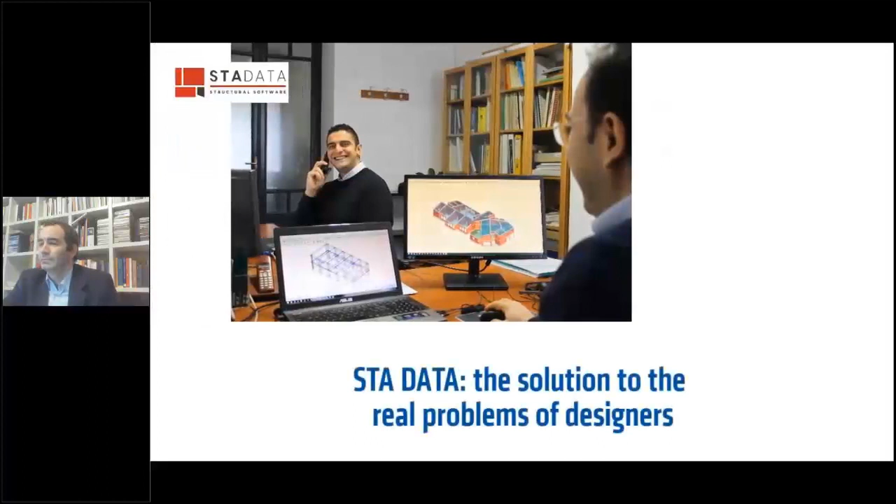The company is currently composed of 15 employees and several consultants, all highly qualified professionals. Thanks to the continuous development of work and collaboration with the university and professional world, it is always able to offer advanced and constant updates to its customers. The STA DATA application allows you to face everyday work with simplicity and effectiveness. The company's goal does not end with the search for new IT solutions. The offer of STA DATA includes support, training, and consulting services, including individual projects, so that professionals are immediately operational. Thanks to the technical expertise and state-of-the-art solutions, STA DATA is a solution to the real problems of designers.

3Muri is the masonry structures analysis specialized software. It is the leader in the world. It is used for existing and new buildings. The software performs nonlinear pushover analysis. The mesh is made with the FME method, frame by macro element, specially studied for masonry structures to better represent the behavior of masonry structures.

Now the software is available in Italian, Greek, English, German, French, and Albanian, and performs analysis according to Eurocode 6, Eurocode 8, Italian National Code, Switzerland National Code, and the Netherlands National Code. 3Muri originates from Professor Lagomarsino's academic research, and it is actually used for this purpose in more than 80 universities. Engineers and companies that use 3Muri for professional purposes are widespread in more than 30 countries.

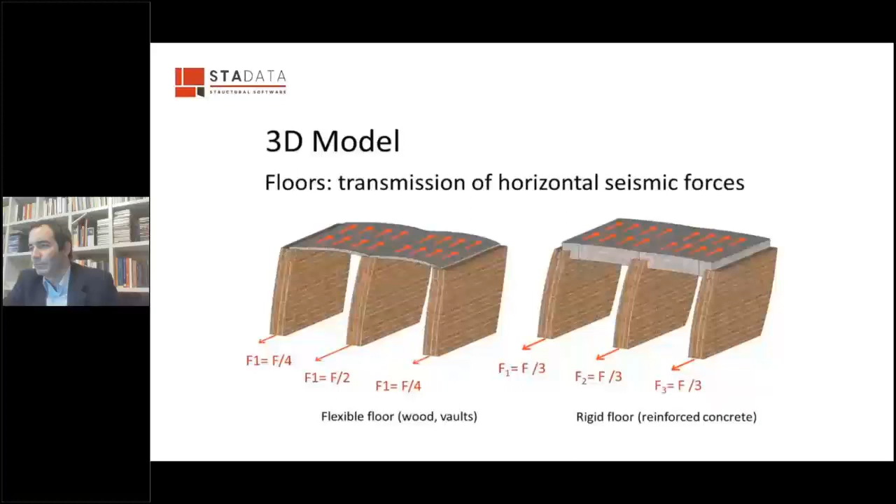Now let's go through the modeling inside 3Muri. One of the most important characteristics of 3Muri is that it is possible to model floors with their real stiffness. As you can see in the picture, this allows you to take into account the correct distribution of the seismic forces on the walls. Inside 3Muri a library of walls and floors is available, and in this way you can easily model this kind of elements. These are the walls that are available in 3Muri.

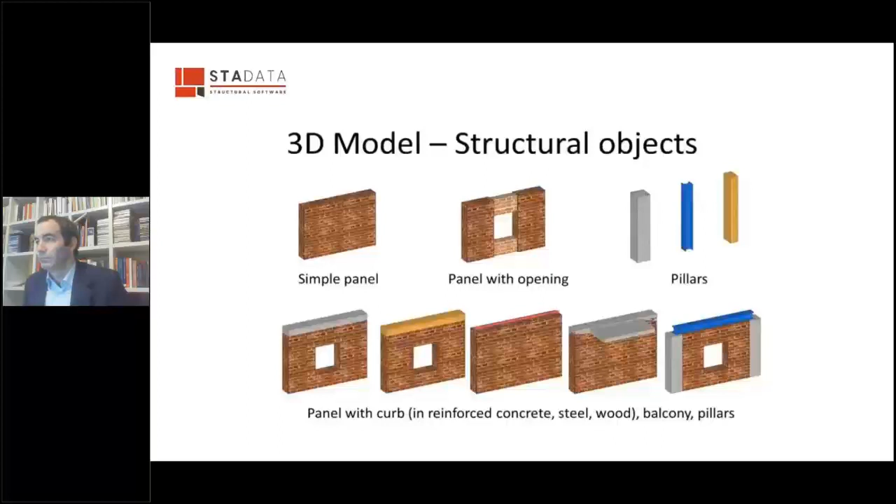Even if the majority of floors can be modeled with this library, inside 3Muri it's always possible to define directly all the parameters of a floor in order to create your own definition and the real stiffness of the real floor you have in the structure. Moving to the vertical elements, several structural objects can be modeled in 3Muri, like single masonry walls or reinforced concrete walls, columns and beams, and a combination of walls with beams and tie rods.

Into a wall can be modeled different materials and elements, which can also have the function of reinforcing the current wall. To reinforce walls in 3Muri, you can easily model reinforced masonry, reinforcement with FRP and FRCM.

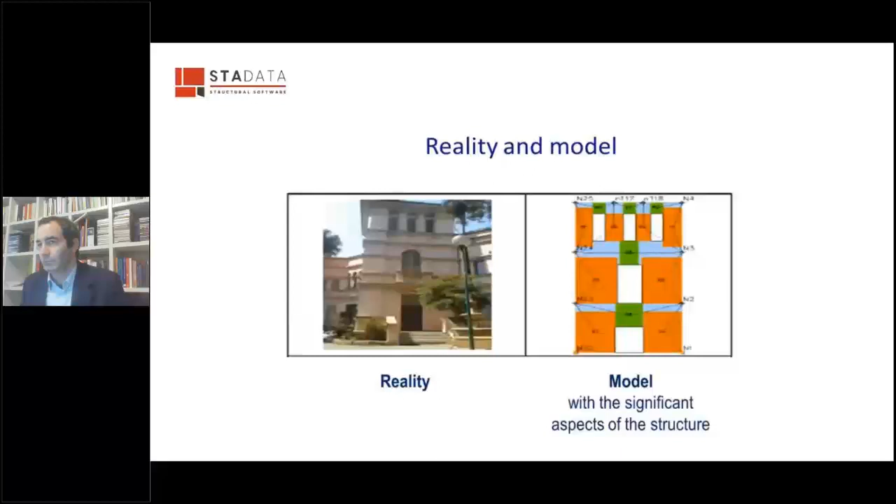The mesh inside 3Muri is specialized for masonry structures and is made with a frame by macro elements method. This method has been studied for masonry structures to better represent the behavior of a structure with a main structure in masonry. Using this method, thanks to the automatic mesh performed by the software, the engineer can easily pass from reality to the model.

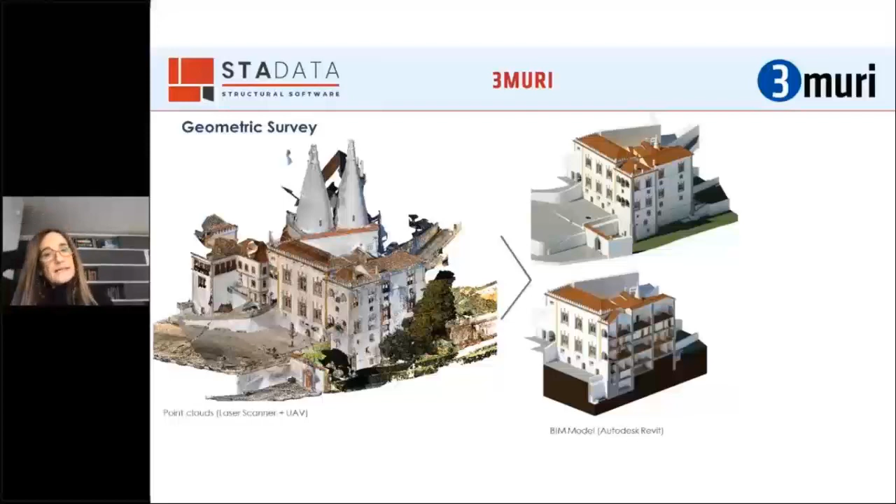In this slide, you have only one wing of the palace, the Manueline building, and a BIM 3D model represented on the right side of the slide. So from the laser scanner of the outer and inner surfaces of the palace, it has been possible to obtain an incredible 3D definition of the geometry of the structure.

To illustrate this, here are some results of these outcomes. We have the complete geometry of the two massive conic chimneys in the palace, the possibility to be sure about the thickness of some walls connecting different parts of the palace, for example the chapel and the kitchen, where the width varies completely along the length of the wall, or to detect some curved walls that would have been impossible to get from other surveys without using laser scanning.

You can also see from this image the possibility to get very carefully and precisely the geometry of the roofing structures, which consist mainly of timber trusses of different types, all over the palace with the exception of the kitchen. All the buildings have timber trusses for the roof, and I'm completely sure that obtaining the correct geometry is crucial for the calibration of numerical models.

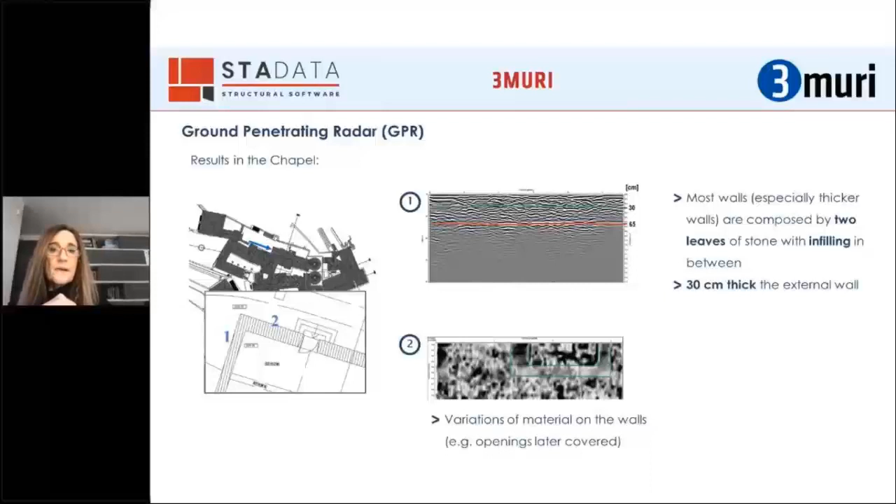For the characterization of masonry, we start with some sample collection, so it's a qualitative characterization of course. The location was chosen on the main structural walls that characterize the principal periods of construction of the palace, being aware of the countless limitations we have in a palace because of the existence of tiles and painting, so it's rather tricky to choose the place to get these masonry samples.

The flat jack tests were carried out preferably in the same walls where samples of masonry had been removed, or if not possible, in very close walls. The objective was to characterize the mechanical properties of masonry.

It's worth mentioning that the inspection windows we obtained before carrying out the flat jack tests allowed us to proceed to the masonry qualitative evaluation. So it was really very important for the qualitative evaluation of the masonry.

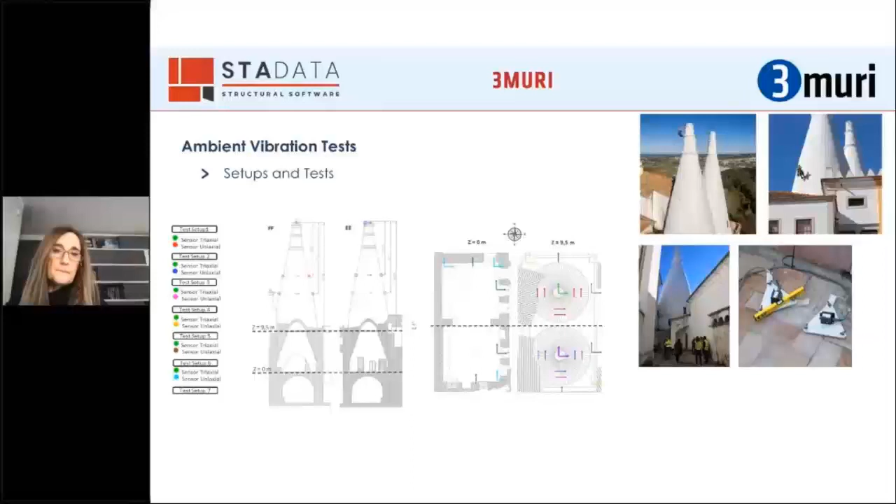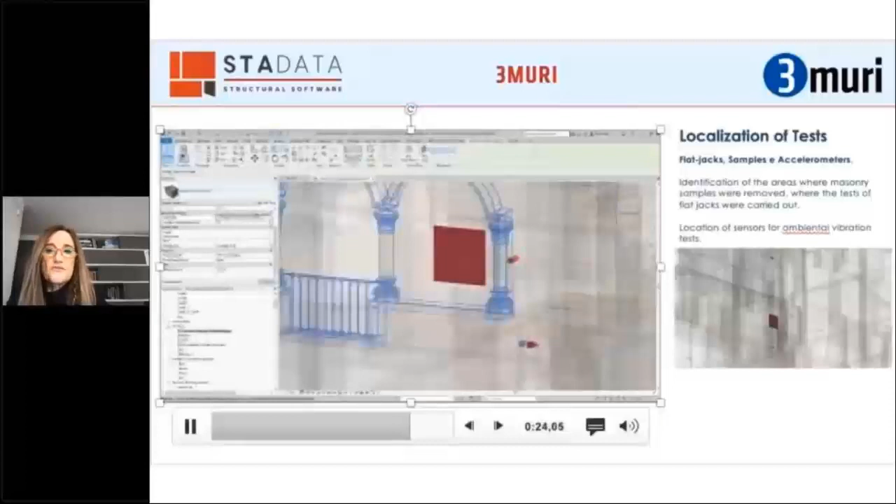This film shows how the information related to the masonry samples, flat jack tests, and ambient vibration tests have been inserted and linked to the BIM model. We have the identification of the areas where the masonry samples were removed, where the flat jack tests were carried out, including some photos and the main results reached. For instance, for the ambient vibration tests, the location of the sensors and the modes of vibration have been considered and included in the BIM model.

In the BIM model, it was identified all the floors and walls where the GPR tests have been performed, and the main results were really important as well. As you can see here, linked to the BIM model, the report with the main results of these GPR tests.

The mechanical characterization of the materials defined after the realization of the experimental campaign and after the calibration of all the numerical models were also linked to the BIM model. Here you can see for the same building, the Manuelino building, all the types of masonry and materials considered in the model, as well as the properties needed to perform the nonlinear analysis of the global model with the 3Muri program.

So let's move now to the definition of the seismic assessment itself and numerical modeling of the palace.

The definition of an effective nonlinear model for the seismic analysis of masonry structural elements represents a crucial step towards a proper seismic assessment of existing masonry building structures. For the seismic assessment of the palace, we have considered the in-plane and out-of-plane responses of the masonry, and we have performed nonlinear analysis.

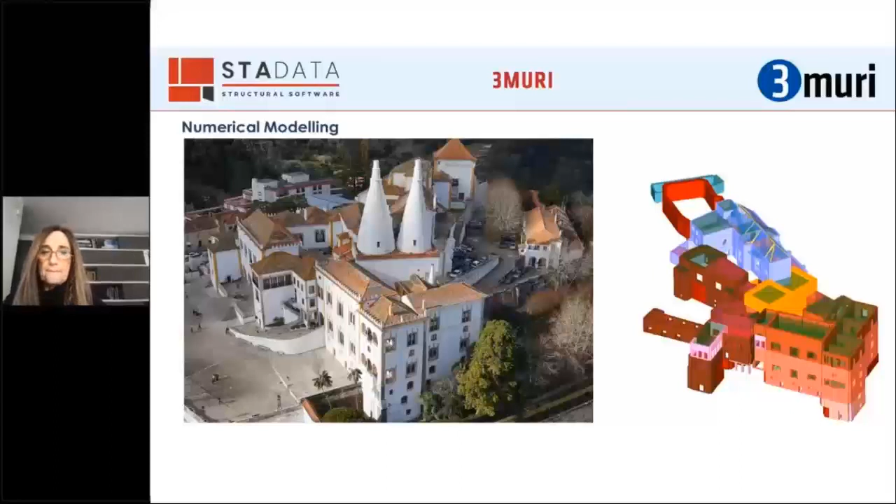Therefore, separate models were developed and calibrated, considering all the time the effect of the adjacent buildings and taking into account the field survey and results of the experimental campaign, mainly the ambient vibration tests, which were crucial for the calibration of the different numerical models.

So here we have the identification of all the bodies considered in this study, with the designation of the names given for all the bodies. I have to say that among all these units, unit 1, the Manuelino building, and unit 10, which corresponds to the kitchen with its two high chimneys, were the most challenging ones, due to different reasons.

If we move to the Manuelino building, this challenge was mainly due to the dimension of the building, irregularity in plan and in height, different levels, and walls without continuity in height. These were the main reasons why it was so difficult to reach the final model of this wing of the palace.

For the kitchen, unit 10, this was mainly due to the presence of the two massive chimneys with a conic configuration. In this case, we have used different software, starting with SAP 2000.

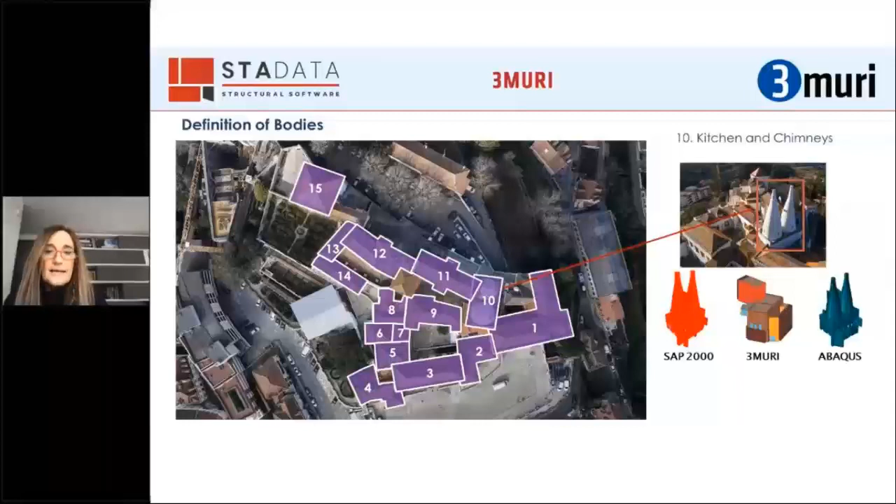So now, to illustrate the type of results obtained, the main results for this Manuelino building and just for the other body connected to unit 1, I'm going to show very briefly the main results that we obtained.

For the Manuelino building, as you can see, we have the building itself, and we modeled it taking into account the constraints imposed by the other building. This is the other building which connects to the Manuelino building at this part, and this is the kitchen which also connects to it. Small parts of these buildings are modeled, the ones necessary to obtain the correct dynamic characteristics for the analysis, and we considered different types of materials described on the right side of the slide.

For the global seismic assessment, we take into account the in-plane behavior of the walls. We performed nonlinear static analysis with the 3Muri program.

In this slide, the damage pattern for the ultimate displacement of pushover analysis is represented for the load applied in both X and Y directions. The distribution of damage of different masonry walls is represented for the near collapse limit state. This extreme situation allows us to identify the most vulnerable structural masonry walls and the type of behavior we expect, whether shear or bending controlled.

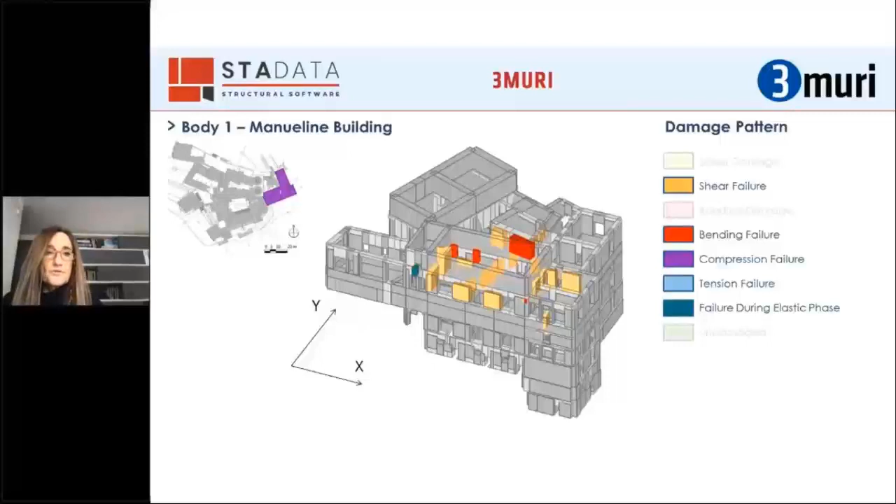We also considered the out-of-plane response of the building. This was evaluated by nonlinear kinematic analysis with the 3Muri program using the modulo local mechanisms. But given the very good conservation of the palace in general, no cracking state has been acknowledged.

Thus, the identification of possible out-of-plane mechanisms was based on the geometry of the building and assumptions related to the quality of connections between orthogonal walls and the roof, and between walls and floors, the layout of openings, constructive details, and restraints given by the structure such as the presence of tie rods. All these were taken into account to define the mechanism with the highest probability of occurrence.

A similar type of study has been done for all the other units or bodies into which we have divided our palace. Just very quickly, what we get for the other buildings, bodies 2, 3, and 4, that were connected to the Manuelino building.

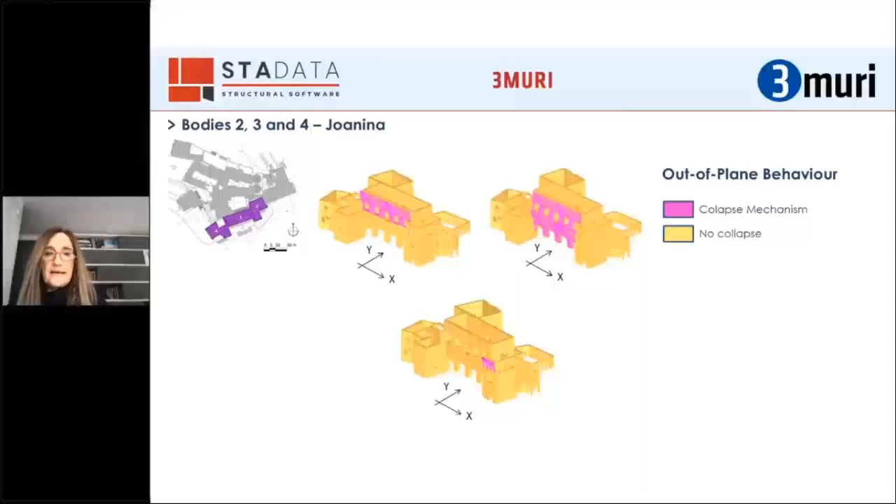So, to finish my presentation, just a few final comments I would like to give. Due to the complexity of this cultural heritage building, the seismic assessment poses a strong demand on structural engineering skills and on the available structural analysis techniques.

The procedure followed here seems capable of providing a reliable seismic assessment of such complex structures. In my point of view, it's a good compromise between computational effort and guaranteeing a trustworthy assessment.

Finally, related to this last image, in this study we had the BIM model, the distribution of damage of different masonry walls for the near collapse limit state. These have been implemented in the 3D BIM model. In this work, we did not explore the 3Muri BIM model.

This should be explored in the future, and of course, easy incorporation of these results in the BIM model as attributes enhances the capabilities of BIM, and will be very helpful for decision support within the heritage management framework, and certainly very useful for any management team of this type of structure.

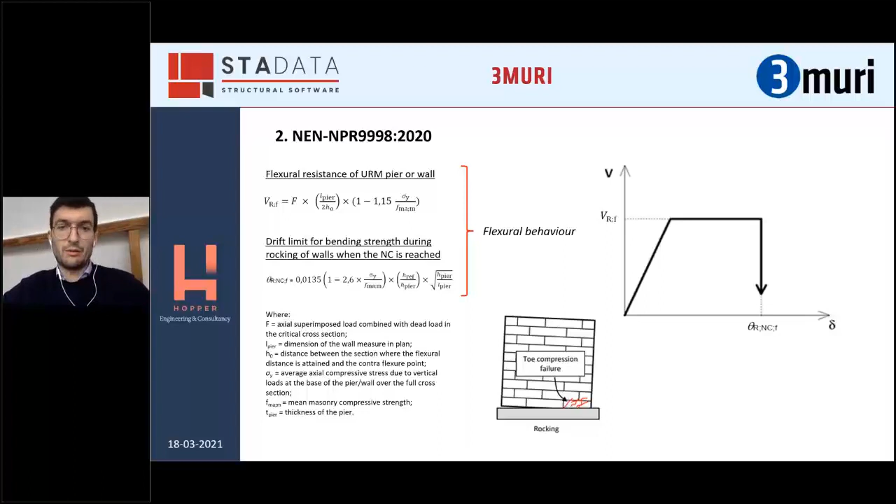The shape of the backbone is very similar to the Eurocode, so similar to what's generally used in Italy. There's a little difference in the shear behavior: the bed joint sliding peak value from the backbone is derived from the generally known equations, followed by a post-peak behavior which is only the frictional part. Also interesting, for this mechanism the in-plane drift is set for near collapse at 0.75% of the effective height, since everything here is set for near collapse.

Another important thing is when to stop the analysis. Generally, a 20% decay is used; in the Netherlands, the national code uses 50% decay, meaning a reduction of the base shear by half, and this defines the final pushover curve.

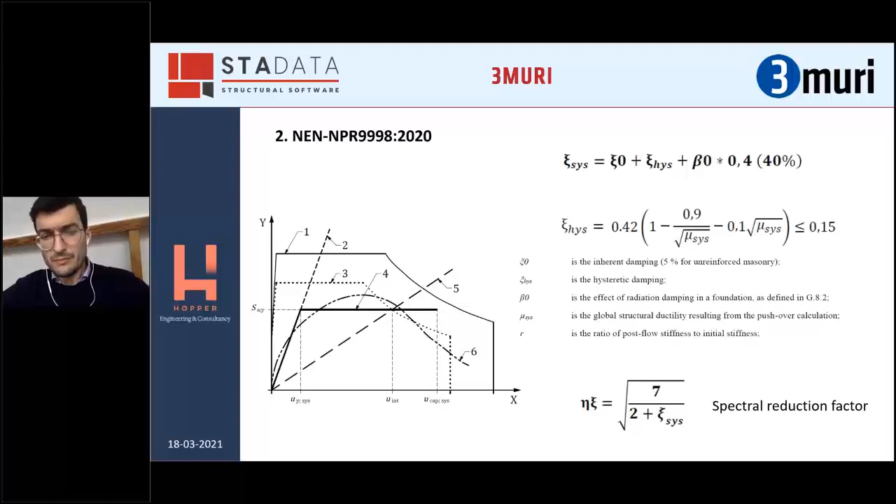It's interesting to compare this with what's commonly done in the Eurocode regarding calculation of the demand. In the Eurocode, as in Italy, we generally use the N2 method. In the Netherlands, it's normal practice to use the capacity spectrum method, in which the elastic response spectrum is reduced accounting for extra damping. The final damping is the sum of the inherent damping, commonly 5%, and the hysteretic damping, calculated per NPR equations, generally not bigger than 15%. So all buildings easily reach about 20% damping.

So acceptance criteria is basically an intersection. The building can be considered passing the check if the bilinear curve, derived of course from the capacity curve, can intersect the overdamped response spectrum.

Let's move quickly to the examples. Those attending from the Netherlands will recognize this as a very common building type in the Netherlands and also in the Groningen province. This is a terrace house, basically a composition, a block with more units.

It is characterized mainly by large openings in the longitudinal direction in the front and back facade. So we have a very weak direction, the longitudinal, and a very strong direction, the transversal. The load-bearing part is usually the transversal walls. In this case there are concrete floors, but you can easily find a version of this building with timber floors. The floors generally span from transversal wall to transversal wall.

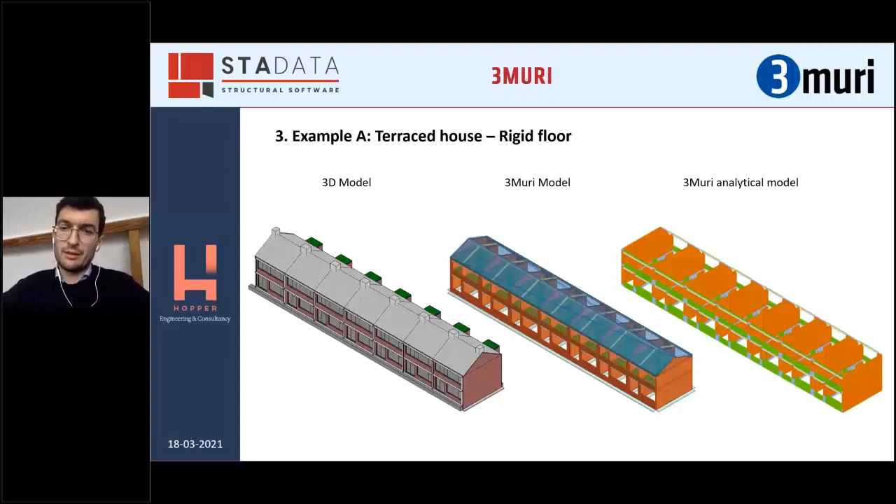Here is just an example of how to go from the 3D model to the 3Muri model, to the 3Muri analytical model, in which, as we just said, there is no roof. The response spectrum can easily be downloaded from a web tool.

So some results for this particular building. The longitudinal direction is governed by flexure, because the piers are very, very slender and few of them, due to the openings. The capacity is quite large.

The spectrum has a damping of 20%, creating an intersection. So the check is okay, the building is okay. This is the worst combination in X.

An interesting aspect of the NPR is that you can account for P-delta effects. Basically, when you have not too many piers, you can derive a factor by which you can reduce the capacity or increase the demand, depending. In this case, we reduce the capacity.

Completely opposite behavior in the Y direction, basically the strong direction, in which the building is reacting mainly in shear due to the squat walls. As we said at the beginning, this is the strong direction, and you can see by the intersection - the intersection with the elastic spectrum is happening in the elastic range, so also in this direction there are basically no issues.

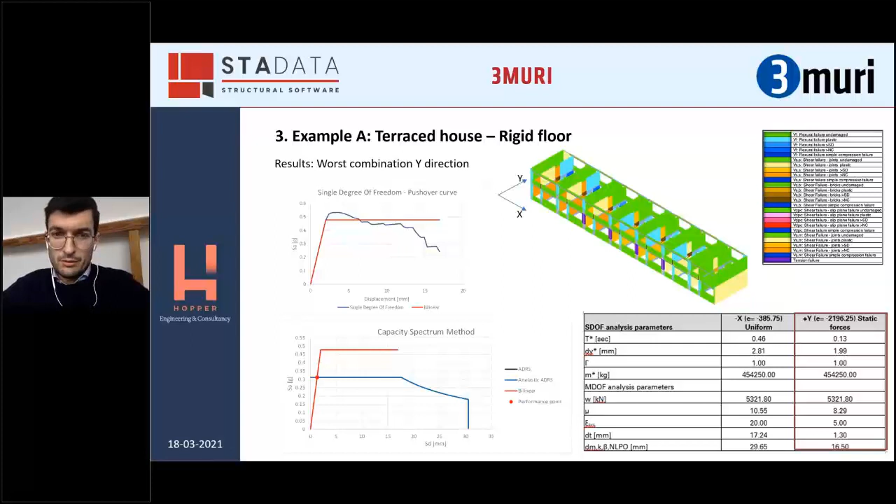This is the summary of the 24 combinations. They are all fine, basically.

Another interesting aspect to mention is the possibility to take into consideration torsional effects, meaning reducing the capacity or increasing the demands with a factor to account for the torsional flexibility of the building. This can be done according to the NPR with a modal response analysis.

As well known, pushover analysis is not enough to provide an idea about deficiencies and possible retrofit measures required for a masonry building. So usually when doing this kind of assessment, we always do a modal response analysis to check the roof and timber components, and also to calculate the torsional factor.

We check the existing condition for boundary conditions, nonlinear kinematics for out-of-plane response, check of non-structural elements, and check of foundations.

The second typology I would like to present is the so-called detached house, in which basically they are isolated buildings, mainly one floor. So they present also a different but still timber roof. Sometimes the roof can be very, very complex.

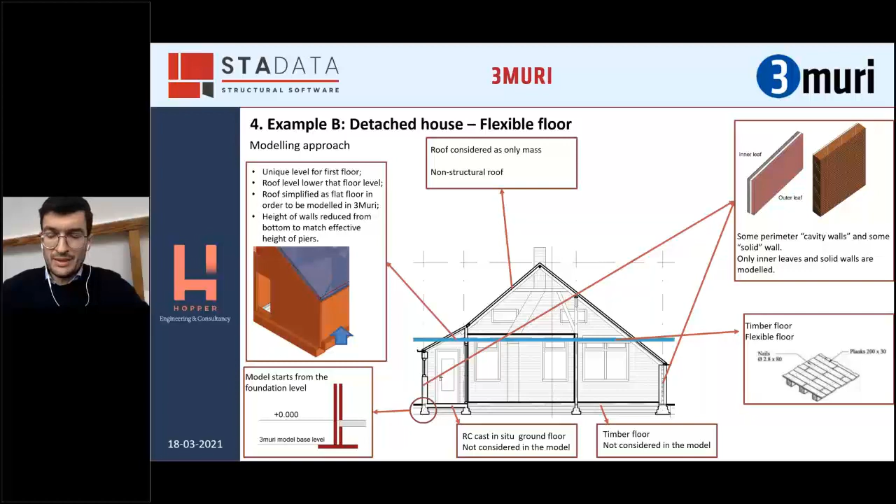This means that compared with the previous building, where a global analysis is correct and possible, for this type of building, since redistribution is not guaranteed by the flexible floor, we prefer an assessment wall by wall, in which distribution is not taken into account at all.

So again, this is shown now to go from a 3D model to a 3Muri model to a 3Muri analytical model, in which we don't have the roof.

The response spectrum follows the same approach as before. Results in this case are presented wall by wall, as we said. This is again one of the worst combinations in the X direction, in which the outcome is positive.

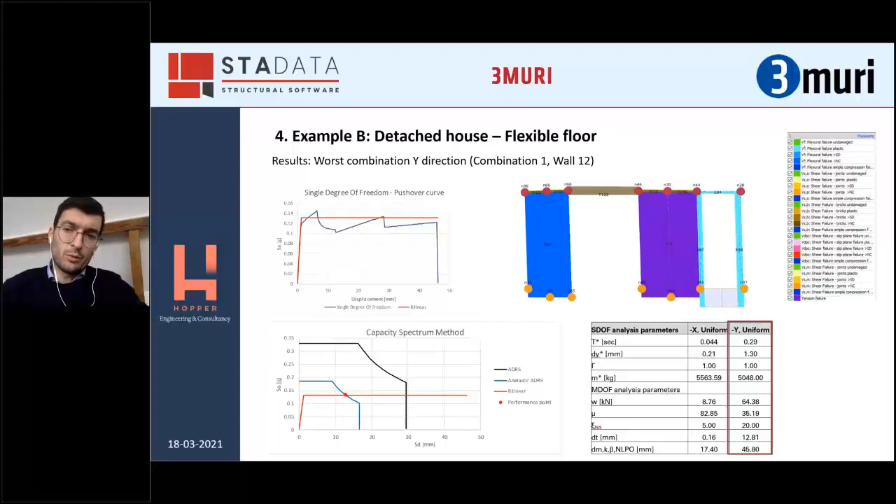Same for a wall in Y direction. And if we want to have a summary here, of course the combinations are more numerous, but it's not about combination, it's just that this is a wall-by-wall assessment.

As you can see also here, basically all the walls are fine. So again, I will not repeat, but basically in order to have an idea about the building, a number of other analyses and assessments and checks need to be done.

So finally, some conclusions to wrap up. Along the years, specific advanced studies and analysis were carried out in order to adapt the approach from Eurocode and New Zealand code to the Dutch buildings for the in-plane assessment. Several tests and research programs were carried out over the years to improve and remove conservatism from the Dutch seismic code. The substantial reduction of gas extraction in the region over the years led to a decrease of the seismic hazard prevision.

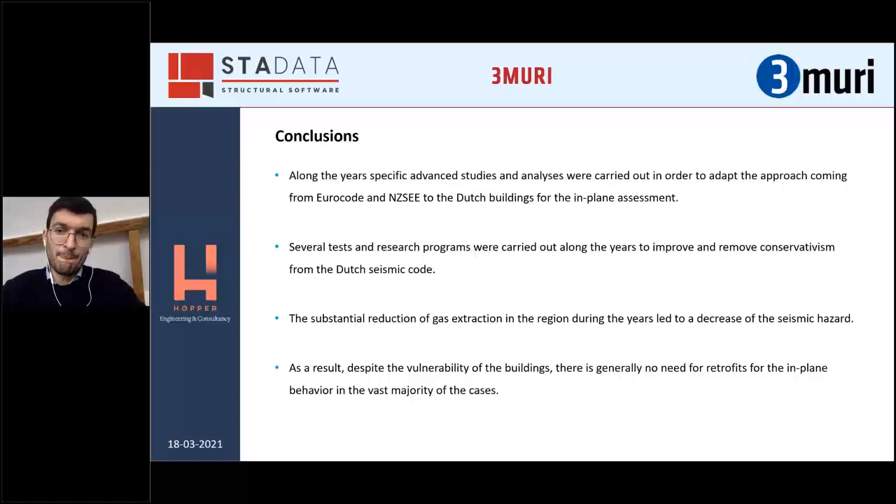As a result, despite the vulnerability of the buildings and the walls that I highlighted, there is generally no need for retrofit for the in-plane behavior in the vast majority of cases. So that's it. I would like to give special thanks to the reseller of 3Muri in the Netherlands, Technosoft, and also to STADATA for having invited me. Thank you.

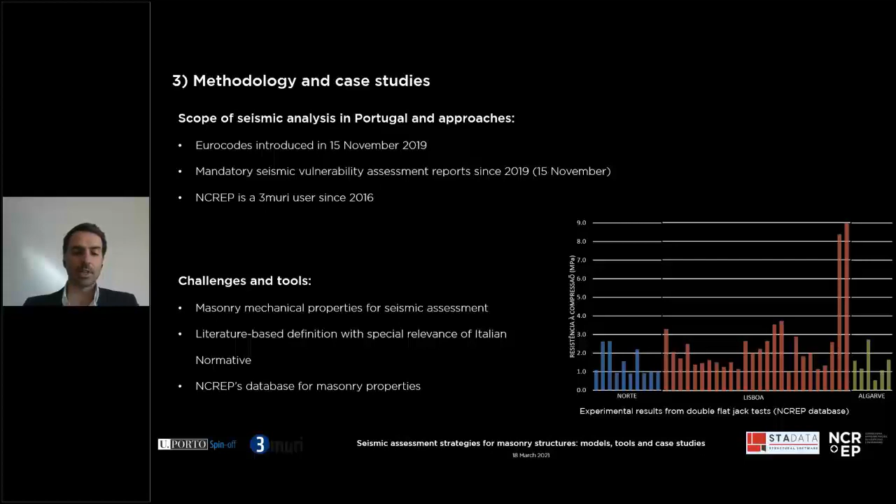Basically, the definition of masonry mechanical properties for seismic assessment, because there isn't a huge database that we can consult, for example, as you have in the Italian normative, where you have very good indications of masonry properties. In Portugal, we don't have this type of information. So what we usually do is a literature-based definition with special relevance to the Italian normative, and we also use our own database that we are still increasing. We now have almost 50 double flat jack tests performed on different types of masonry structures, and our main goal is to continue increasing this database so we can more specifically select the best mechanical properties.

Concerning the first case study, we have a ground floor, first floor, and also an attic that was used during all these years. This building has an estimated date of construction in the 18th century, with a total construction area of 780 square meters. It is a traditional masonry and timber structure, and it was abandoned since 2005.

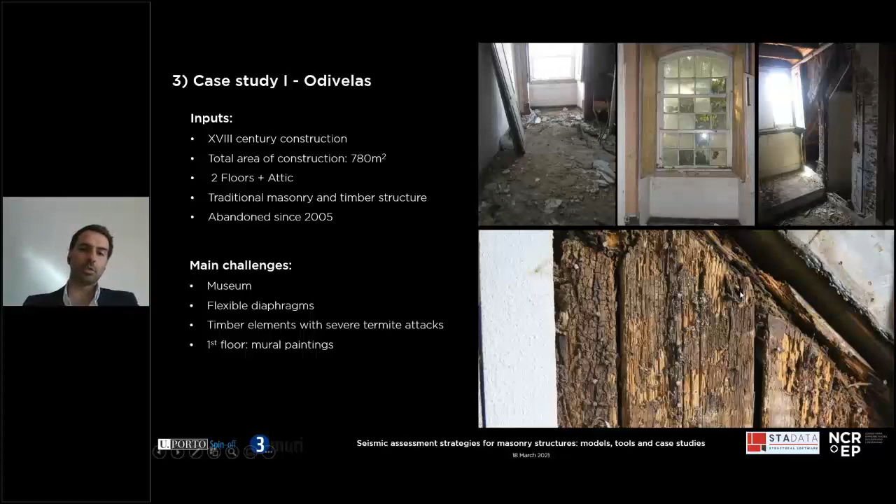Let's say that in the end, this was a problem, but the major problem was that at the first floor, between the ground floor and the attic, we have all these walls with mural paintings. This was a major issue in this case study. These walls were painted, and one of the main purposes of this intervention was to keep the first floor exactly as it was - the floorboards, walls, all the wooden elements, and if possible, also the ceiling. Then we decided how to analyze it and how to strengthen it while keeping all these elements.

This is a presentation of the structural configuration. At the perimeter walls, there was stone masonry, irregular stone masonry, mainly on limestone. We also have some internal masonry walls, and then some timber framed walls that were also used as load bearing walls.

This is the ground floor, and this is the first floor structural plan. You can see the alignment of the timber elements, and here at the bottom we have the structural intervention based on the inspection and diagnosis phase, considering also the vertical load. You can see clearly that the area in the back was in the best state of conservation, while these five compartments at the front had those mural paintings. So the main point was to keep these areas as they were, if possible.

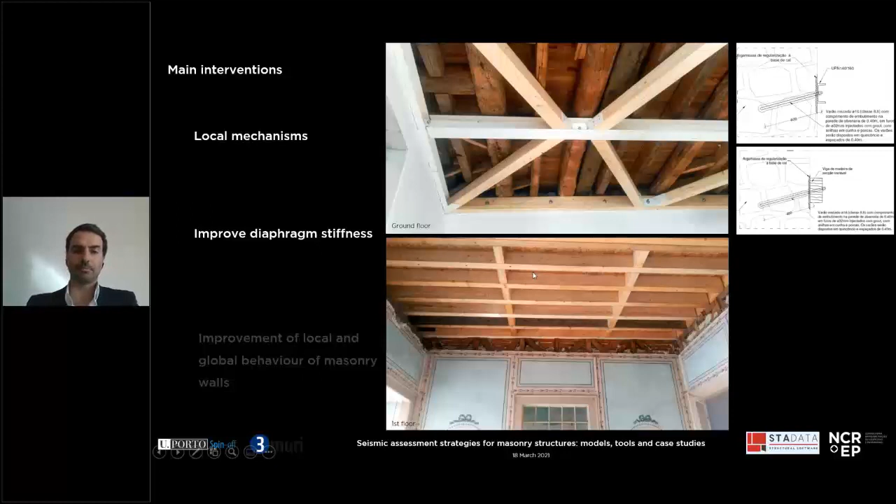Concerning the global and local behavior of masonry, some of the masonry elements - you can see here images from the ground floor - were reconstructed, making use of timber framed walls.

These are some images from the walls, from the demolished part that was not in a good state of conservation, and they were supposed to be injected, but during the construction works, it was decided not to go for a museum, but just go for a more common office building, and it was in the end possible not to use injections to improve the seismic behavior. Here's some local reconstruction of the timber floors and the frontal walls.

Now some final images to figure out what can be done. We can see here that all these paintings were maintained. These are the original floorboards. The roof and ceiling were reconstructed. This is the same compartment before and after the intervention. It came out that with 3Muri we were able to keep the building as it was. Our main purpose was to keep the first floor.

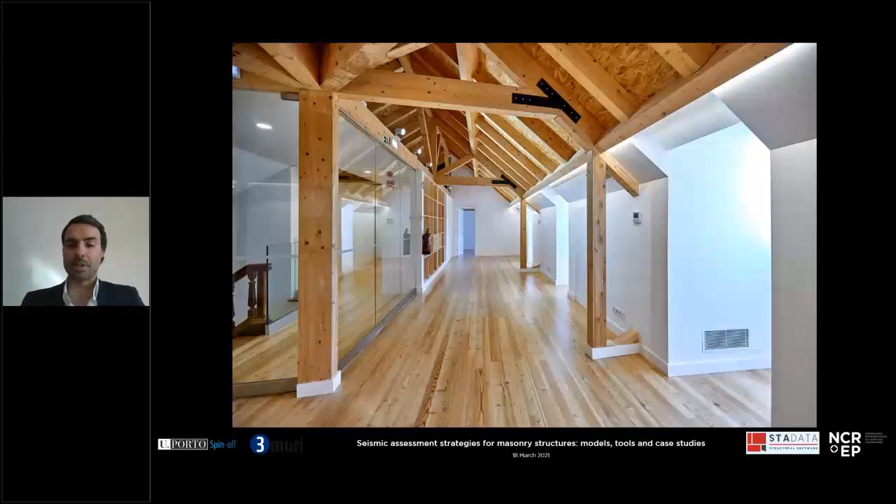So the second case study I'd like to show you is a typical building from Lisbon. It is a 5-story high building with a possible date of construction in the late 19th century, and it has a total area of 6,500 square meters, also with a traditional timber masonry structure.

You can see here on the right, mainly at the perimeter walls, limestone masonry walls, the inner core also of masonry walls, and then we have some intermediate walls that are load-bearing walls that we'll see how they are built. So what were the main challenges here?

The extensive inspection and diagnosis campaign to characterize correctly these masonry elements, in order to model it correctly. Also the mechanical characterization we made use of flat jack tests, some cores, and then we also evaluated the dynamic behavior of the building using ambient vibration tests. This was a problem because it was a corner building, and this could be an issue we needed to address and assess with the seismic analysis.

The final occupation of the building was to be used as offices. So taking into account all the information, we started doing the work. One of the first points we figured out was that, from images from the late 19th century until 1940, the building was just 3-story high.

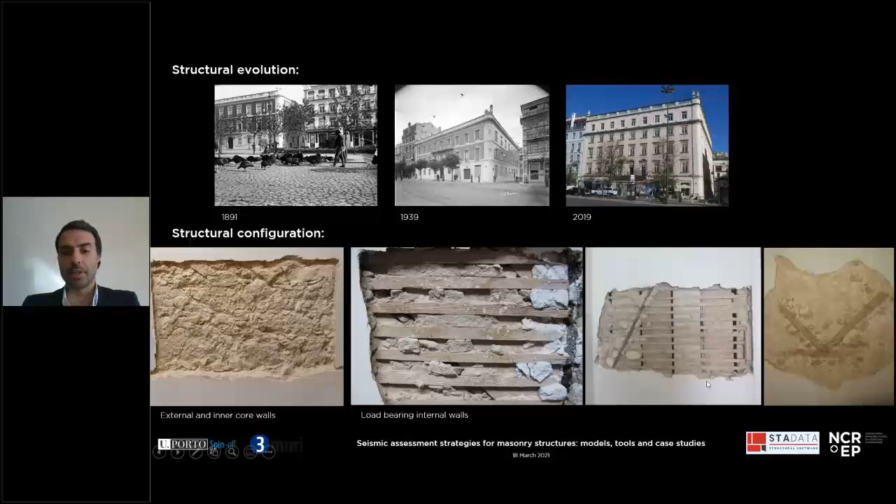What was used in our 3Muri model was to assume only masonry walls as primary seismic elements, as you can see here. So these intermediate walls were not introduced due to negligible contribution to the seismic resistance. We have been doing work in this area, and in the end, the stiffness and strength of the masonry is too big to be able to distribute the seismic forces to other vertical elements.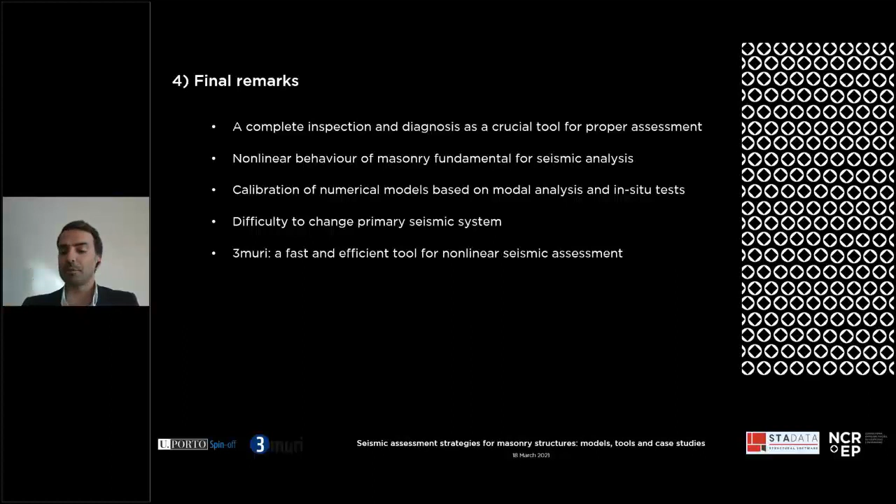So the next challenge, coming in the next few days and months, will be the modeling and seismic assessment of this monastery of Odivelas, and 3Muri will again be our main software. I'll let you also hear from Ana Simões, who is the representative in Portugal of 3Muri. If you need something, just contact her.

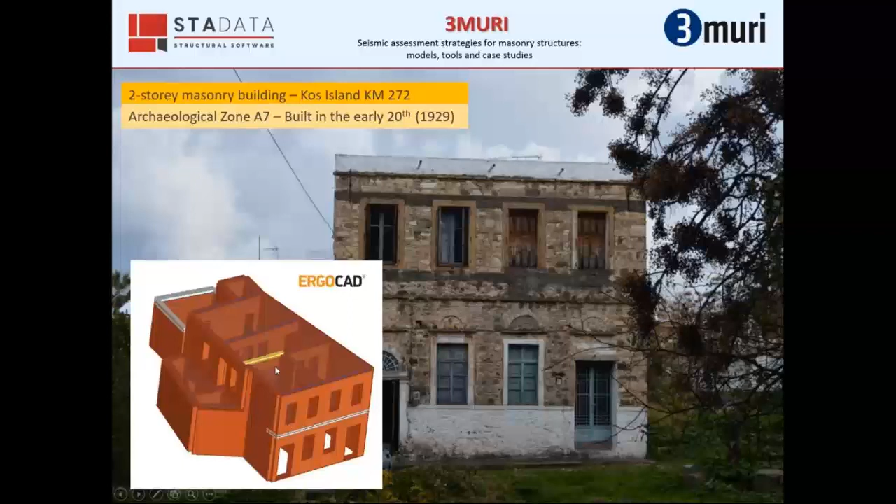The building that I will present is a 2-story building on the island of Kos, built in 1929, which showed damage after the earthquake that occurred in July 2017. At the bottom left, you see how the mathematical model appears in 3Muri. In this case, we used almost all the available 3Muri tools you see on the slide.

Due to a law that applies to earthquake-affected buildings in Greece, we had to use linear analysis to subsidize the owner for the damage to the building. In the final control, of course, we used pushover analysis, even comparing the individual pushover scenarios with each other.

First and foremost, we verified the geometry of the whole building and every element, and all the laboratory tests were done to find the type of masonry. From various parts of the building, we discovered that it had two layer walls consisting of volcanic rock, marl, and limestone.

These photos are from the building. We can see here that there is an existing tie rod on the walls.

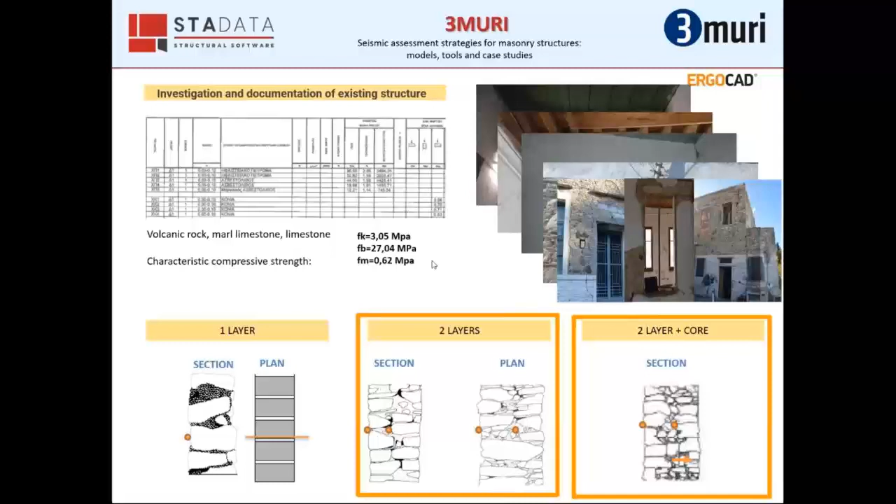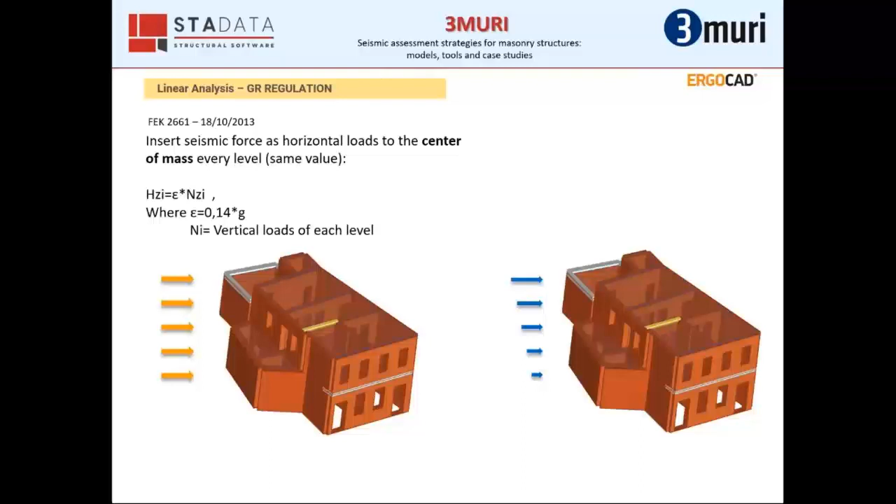So we performed the linear analysis and noted the points where the damages appear on the walls. The goal was to then perform the operations on the damaged elements and to check if they are sufficient, or if, due to operations, failures in other elements occur.

Let's see the steps of this procedure. First step, we check the existing building before the damages, we get the results, and we continue with the second step. Now we have to repair the damaged elements and check at the same time the remaining undamaged elements.

These are the interventions. First, we remove partially the mortar, and install injection tubes at a distance of 30 to 70 centimeters in a diamond shape.

Then we have the Limepor PMP injection, which contains natural hydraulic lime because we couldn't apply mortar based on cement. Then we add facade grout with Kimia Tectoria M10 mortar. And finally, we have the application of Kimisteel Connect and the Wallmesh MR system in two directions.

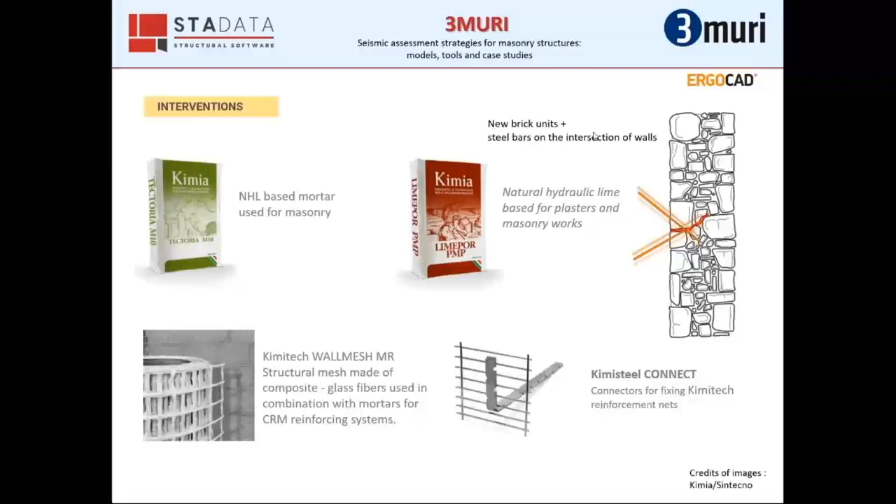Through the next slides, we can see the whole process. The images are not from the real project, but from the brochures of Kimia and Sintecno companies. First, we cut out the mortar from the joints. We drilled the wall and installed the tubes, fastening them on the wall using beton fix. And we inject Limepor, which is acceptable for historical monuments.

Some days later, we started leveling. We prepared the mortar, we laid down the first layer, and then we made it smooth. We put the mesh and we embedded it.

Later, we drill the wall and we insert the connectors and we lock them. Finally, we overlay the connectors and apply the final layer of plaster.

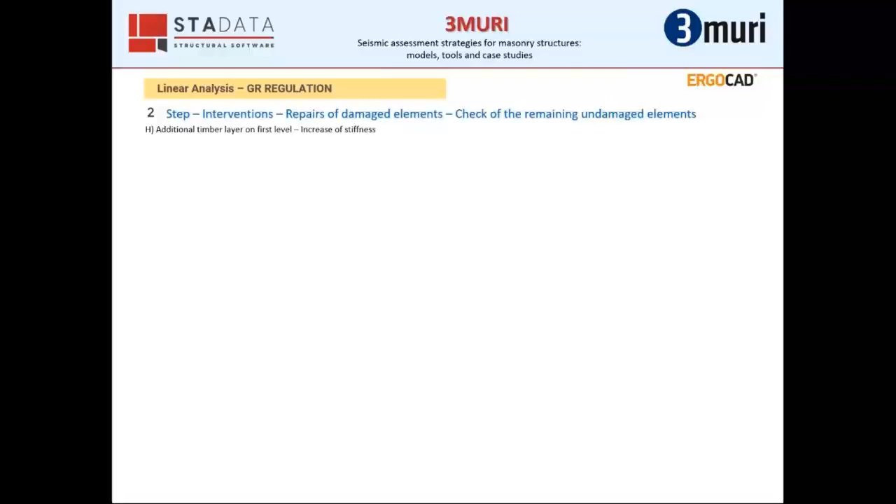After the analysis, we had some failures on undamaged elements, so we decided to replace the existing timber floor of the second level with a concrete slab, and we added concrete beams on the external walls. Finally, we applied the reinforcement, putting a vertical and horizontal mesh of rebars of 8 millimeters diameter every 15 centimeters.

You can see on the right with the blue color the Wallmesh MR application, and with gray color the reinforcement with steel bars.

In addition to linear analysis, we ran a static analysis for the verification of vertical loads as described in Eurocode 6, where all the walls had enough bearing capacity. We can see the results here.

We also ran a modal analysis in order to determine the node which has the maximum displacement. This could be the control node of the pushover analysis, and because we wanted to find the percentage of mass effective for each mode, we later checked the walls through a seismic analysis for the out-of-plane bending. As we can see, all the colors were green, meaning all the checks are satisfied.

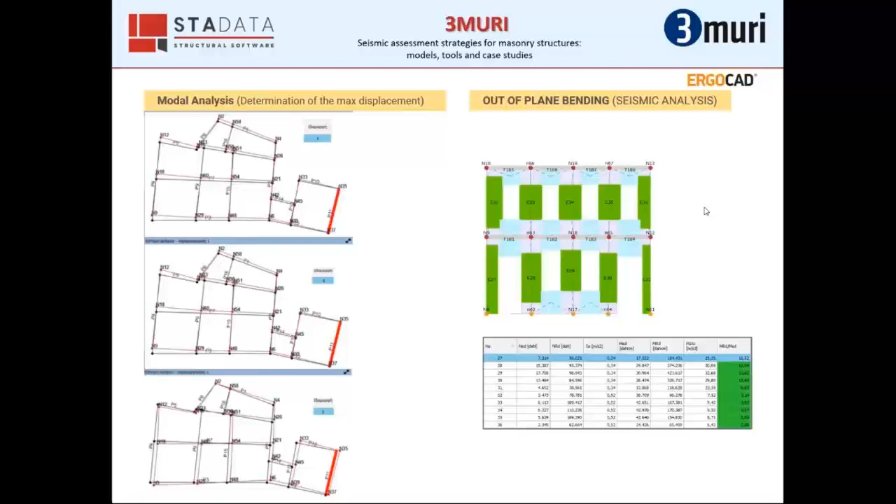As we explained earlier, for the linear analysis we took a ground acceleration of 0.14 of g because of the Greek regulation. The real ground acceleration of this earthquake was estimated at about 0.16 to 0.20 of g. We collected this data from the website www.itsak.gr, and for this reason we decided to run additionally some scenarios using pushover analysis.

For the pushover analysis, we took a peak ground acceleration of 0.24 of g, which is the value according to the current seismic zones of Greece. We ran analysis first for the existing building, and as we can see on the diagrams, the alpha factor, which is the ratio of PGA of each limit state for each pushover analysis to 0.24 g, is over one, except the damage limitation state for the X direction, which is 0.9.

On the opposite, all the factors for the pushover on Y direction are under the one value, as we can see.

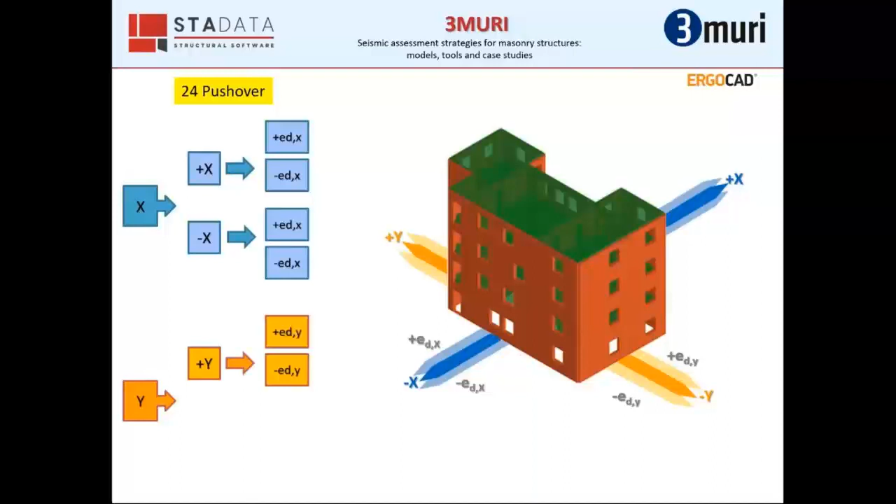It is worthwhile to mention that 3Muri gives a lot of tools to the end user. In this case, for example, we ran pushover analysis for all the main directions and eccentricities of the 3D model, 24 in total, but we also ran additional analysis for more directions in order to verify how the structure reacts to the direction of the real seismic force.

Some other useful tools of 3Muri are presented here. We can compare the pushover curves of different intervention scenarios in order to find the most efficient in terms of cost. We can see the stresses under each wall, or we can run pushover analysis for every single wall, assuming it is isolated from the other elements.

We also, in this example, checked how the structure responds if we divide it into two parts. The results were obviously better, but the division is not acceptable because of the region where the structure is built.

One of the advantages of 3Muri is the local mechanism tool, which helps us check every single part of the walls for out-of-plane behavior. You can see here an example - on the left there is a failure. For this reason, we inserted some tie rods, or replaced the existing ones on the structure.

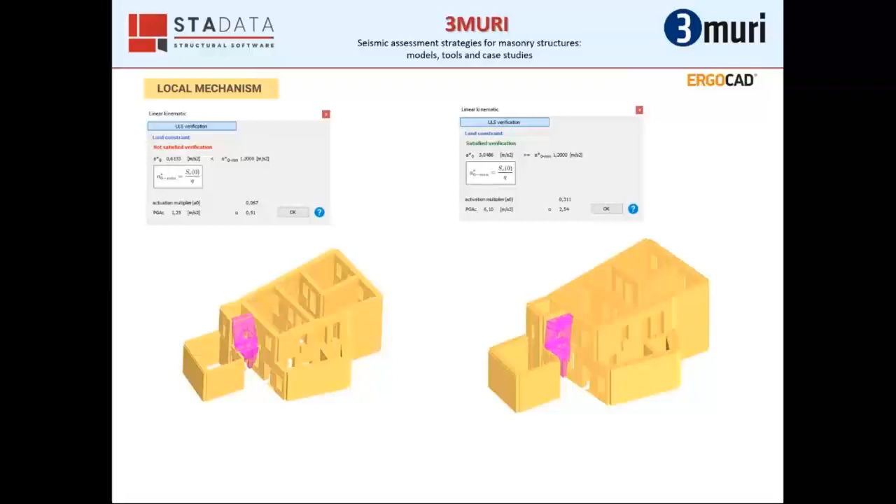In conclusion, we need to mention that there are some parts of Eurocode 8.3 which lead engineers to use pushover analysis. These parts are on the opposite direction of the Greek regulation for damaged masonry buildings, but we hope in the future there will be a common solution for these types of structures.

More specifically, in Eurocode 8.3, the application of linear methods has to follow these conditions.

The floors possess enough in-plane stiffness and are sufficiently connected to the perimeter walls. Floors on opposite sides of a common wall have to be at the same height. Walls are continuous along their height, and lateral load-resisting walls are regularly arranged in both horizontal directions.

If you check these images, for example, you can see that the buildings on the right are not valid for the application of the linear method. The same in this slide.

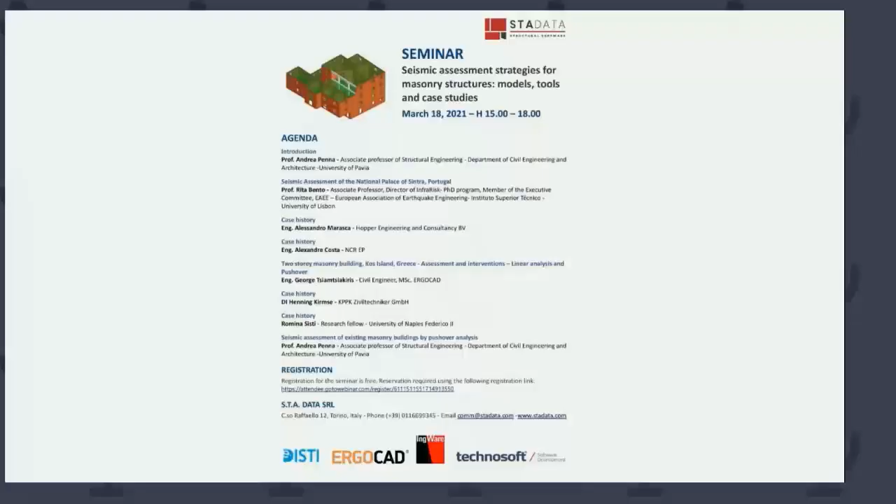I think this presentation was also very interesting, and in particular, it is interesting to compare the different approaches and the different code regulations still implemented in different European countries. Besides, we have a common code, which is Eurocode, but then the national regulations can be very different. The same applies in particular for the presentation by Alessandro Marasca, showing the application of this Dutch code that was actually partly derived from Eurocode, but also with some influence from the New Zealand and US codes.

I think we can now move to the next presenter, which is Henning Kirmse from Austria. I think there will be some other interesting case studies and analysis that he will show us. Thank you, Henning.

Thank you very much. First of all, I feel very honored to be invited also to that event by IngWare and S.T.A.

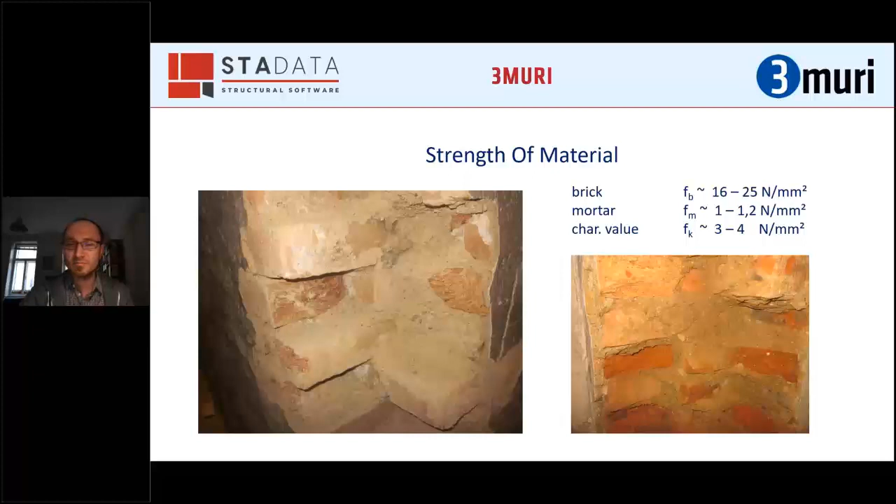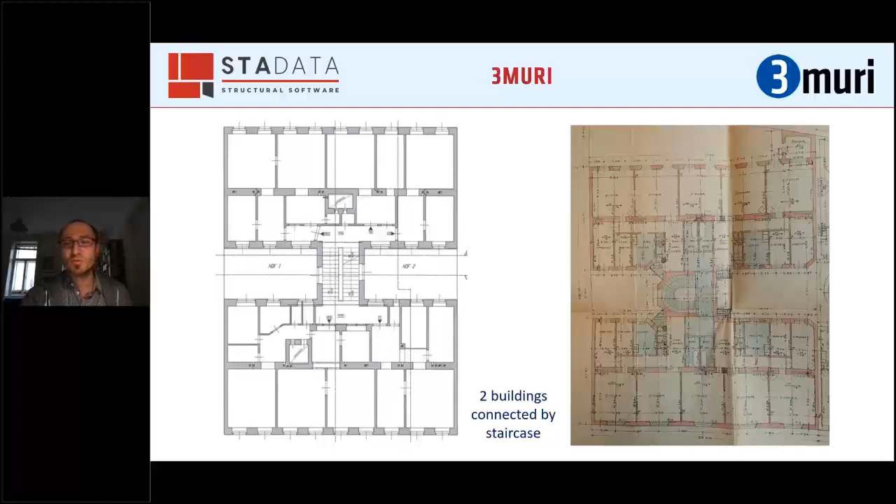There are slightly some other typical types. This one is like a corner building type, which very often causes some problems in that corner, in my experience. The next one, also very common, is the typical two houses with the staircase in between. It can be like on the left side, where you have the staircase directly, but then there's a split level between the two houses. The other possibility is like on the right side, where the staircase is rounded, so you don't have any split level there.

So that is what I told before already. The main walls are all the loads going through that main walls. That means, and these are secondary walls in the y direction.

Main walls, I can add these typical sizes are around 60 centimeters in the upper stories. They will be a little bit less, like 45, except middle wall. Middle wall is, you can say, 60 centimeters from the ground floor to the attic level, because there are also chimneys inside very often.

So the secondary walls are the walls to the neighbor on that side, which are mostly 30 centimeters, and in the attic level then only 15. And the staircase walls are also like 30 or 45.

And then this special thing, these extra walls, which are rectangular to the outside walls, they are very thin walls. They don't take any loads. They're just for the building there in between. And these walls are mostly the important factor.

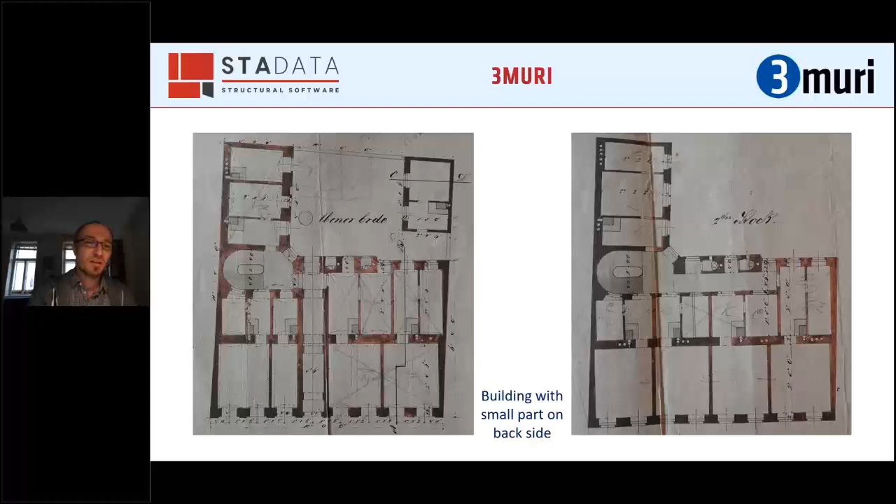Then there are some different ground views, you can say. This is a combination of the standard one with a small part on the backside. This is a huge type, two buildings with two staircases, or corner building with a small part on the backside with also 2 staircases. But all these different ground views you will see are similar in wall thickness and ceilings.

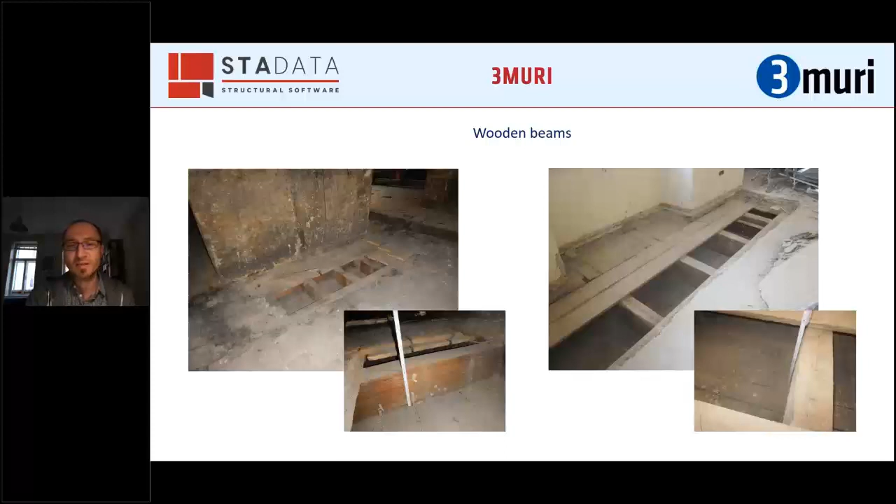Ceiling constructions. We have also very typical wooden beams. Of course, this is the standard which you find in almost every house. These are typically between 20 to 26 centimeters. Sometimes the height can be a little bit more, 30, but this is really seldom.

This is a very massive one. I just put it here because it was a nice picture. This, I must say, is a building which is a little bit older than what I mentioned before. So that is a very massive ceiling.

And then we have that Dippelbaum ceiling. I did not translate that because I was not sure what I could find in English. That means you have one wood to the other, and they're connected with solid wooden pegs. So that gives that construction a very solid type. This is found mostly as the last level above the 3rd story or so, you can say. You will find very often this type of ceiling.

And then we have also sometimes in the later part of the period, you will find not only wooden beams, you will find steel beams, and between that steel beams, you will have the wooden beams. Steel beams then have a distance of 3 meters or something like that. So the wooden beams inside that are a little bit smaller than before.

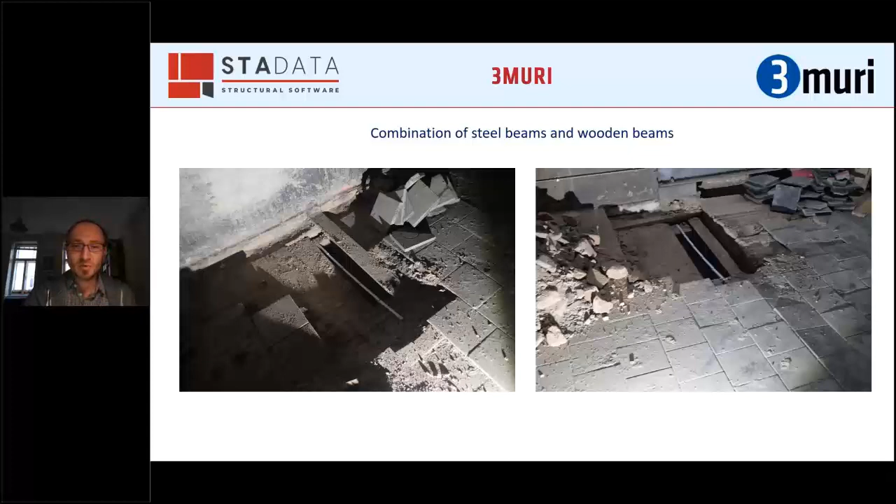And then strengthened construction is mostly done by the composite structure of wooden beams and a concrete slab, small concrete slab around 8 centimeters, which gives that ceiling a very stiffness, so that you connect all walls of the building in that area of the ceiling.

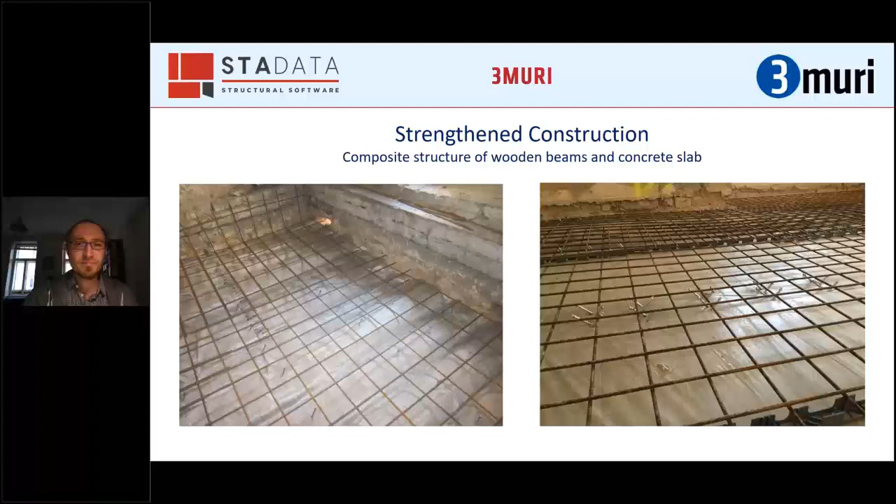Then I must say by the authorities until 2008 or so, there was a standard here regarding the seismic loads, and then from 2008 started the era of the EC8, and in the beginning time it was a very difficult thing with the attic conversion because it was not clear how to do that in a static analysis.

And then in 2013 came the new national annex, and here it was found the possibility. It is similar to the Swiss standard, because all the buildings, they don't have 100% earthquake resistance. So it's really rare to find that. So that means we have to see what's the resistance of the existing building and what's the resistance after the construction.

This is also done before with a reliability analysis. I just try to translate a little bit and put some examples. That means you have to calculate a number of persons who are in the building. This is in different categories. Let's say 10 flats, and there are 2.35 persons each flat.

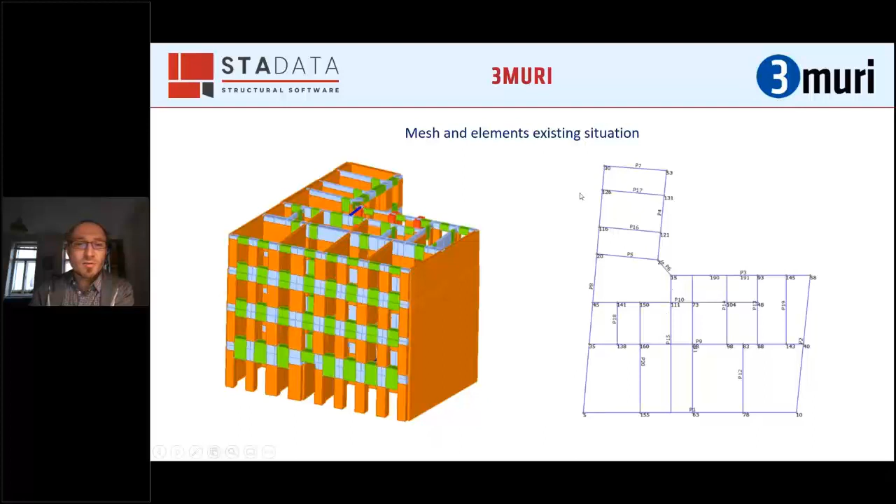Okay, then I'm coming to 2 projects. This is a very typical one, which is now in the authority phase, the permission phase. This is like a typical building. Here you see the existing situation done in 3Muri, and the mesh with the ground view, and we could figure out here the element wall, which was... here comes the building to about 43%, 44% of the earthquake.

And then the planned situation: the strengthening was the ceiling above the 3rd floor, because that was also wooden beams, and there will come a composite wooden beam concrete ceiling, which connects all the inside walls then, and can transport the shear forces from one wall to the next one, and we can activate walls like that or like that.

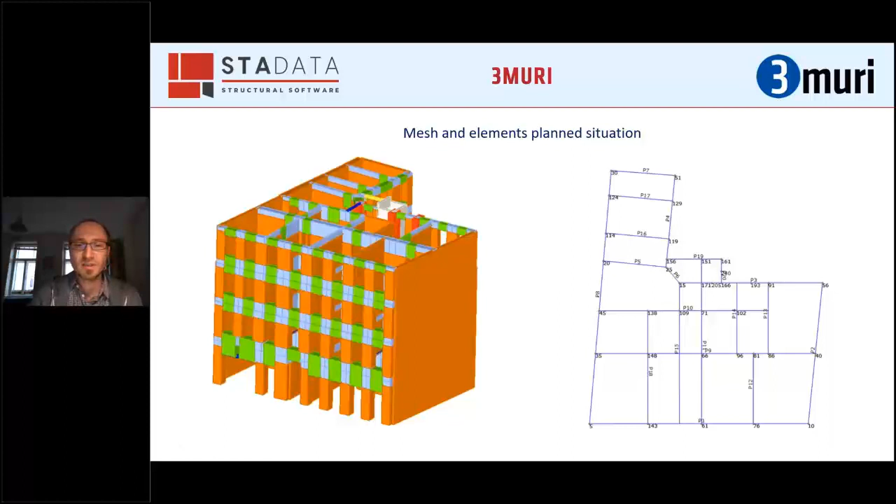And also, of course, there is a lift here in concrete, which will bring a positive effect. And then we are calculating the planned situation, and it's the same building, only loads will be changed, and the lift is coming, and the ceiling. And you will find the important element here, and we could raise up around 10% the seismic resistance.

Special is that here in that story there's a big hall, you can say. These rooms are around 7 meters high or so. And then we were again calculating that in 3Muri. We found there was an existing concrete shaft inside. Found the element.

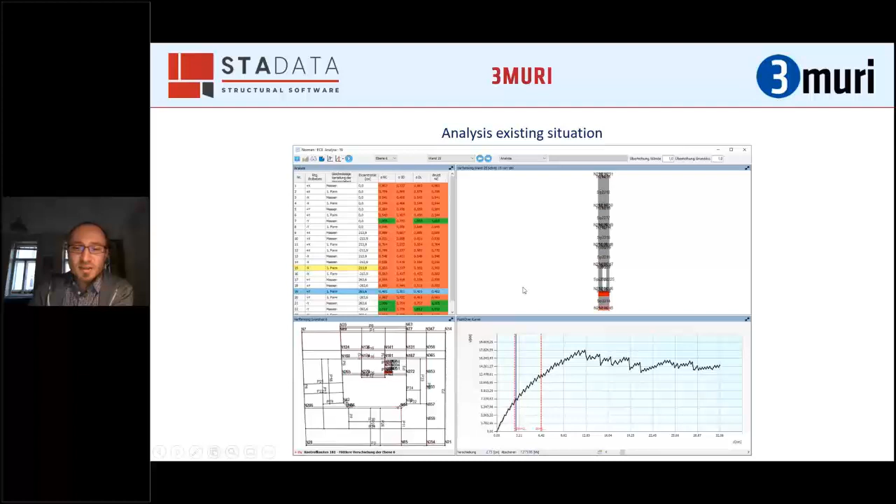And then here some more strengthening has been done, such as steel frames in those areas. Ceilings, all ceilings were stiffened with either concrete slabs or composite wooden beams with concrete, or solid timber boards on wooden beams. And also new shafts for lifts were built up inside and connected with concrete slabs to the rest of the building.

And then it was also calculated again. You see here these lift shafts inside. And again, we got after that the new seismic resistance.

Yeah, and some impressions of that building. Here we can see that we're building these massive steel frames. Also some injections in some areas in the masonry walls have been done.

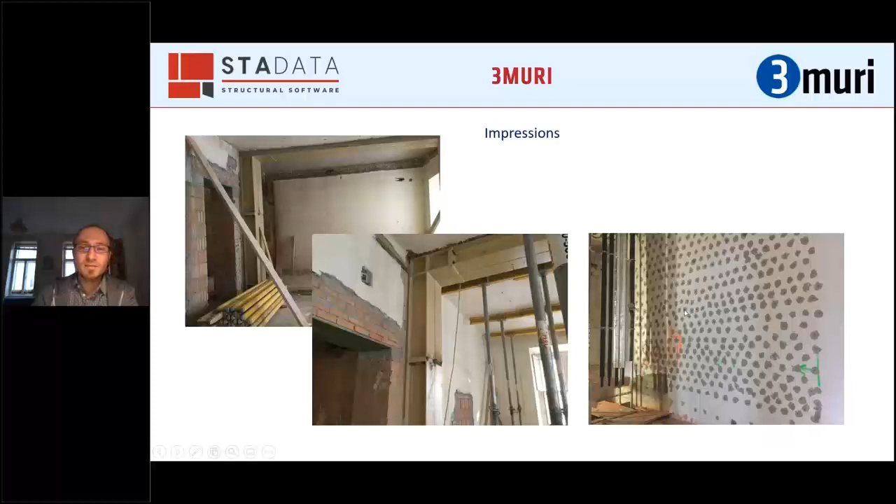Here you can see the beams - we left the wooden beams inside and strengthened them with other wooden beams, and then above it came a solid timber board connected with outside and inside walls.

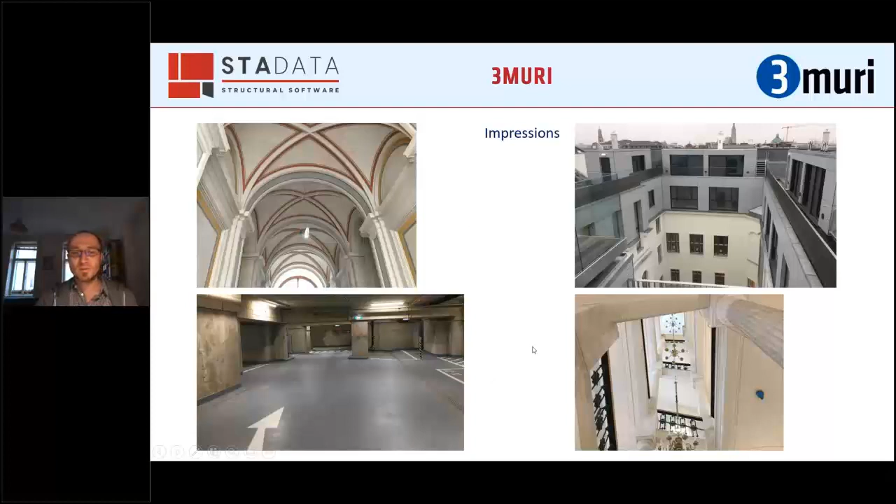Yeah, there were also a lot of concrete works done because that building had 3 basement floors, which got a garage inside, and then this is the building after all constructions were done, how it is now. So that is more or less the end. Thank you very much.

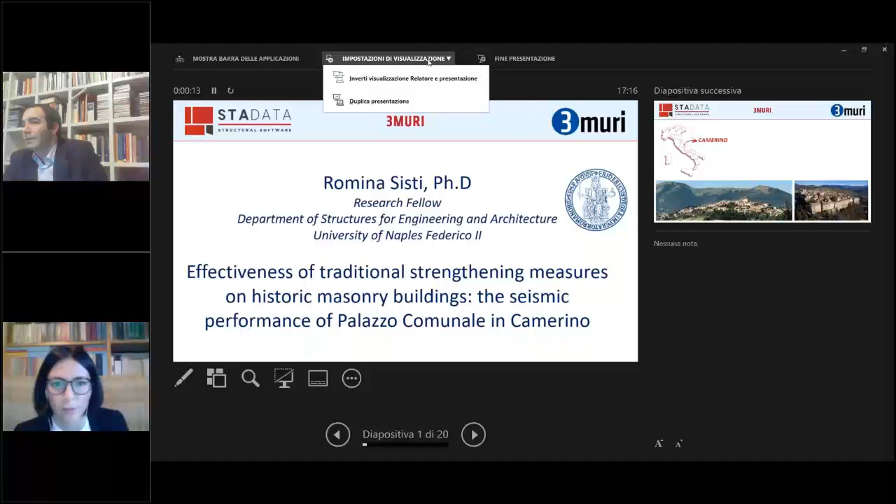While Romina is solving this technical issue, I can say that this topic of Camerino is very interesting, because the city of Camerino was completely closed after the earthquakes that struck central Italy in 2016-17, and the work Romina is going to present is really very relevant.

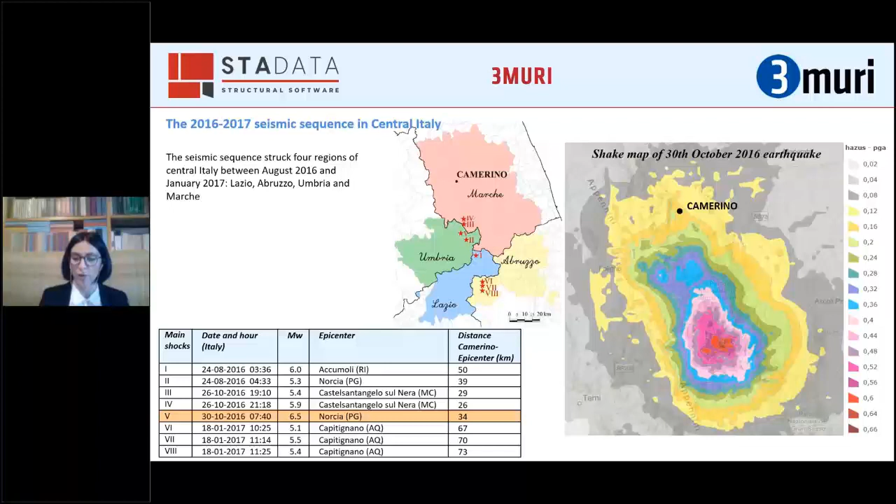In particular, on the west side of Palazzo Comunale, there is a theater called Teatro Marchetti, built in 1728 by demolishing pre-existing structures.

Palazzo Comunale is a three-floor building with an average floor surface of about 1,400 square meters. The building is characterized by the presence, on the first floor, of three staterooms with double height, featuring Camorcanna vaults - made of plaster and reed straw - hanging from wooden centerings.

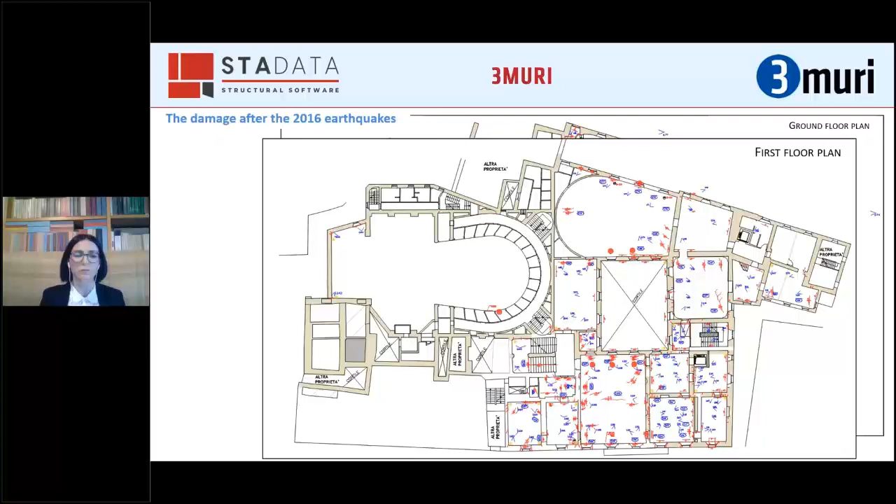I will show you a brief overview of the main damages. We observed some cracks on the interface between the main facade and the vaults at the ground and first floors, but no damage was observed at the top floor. So we can rule out the possibility that the main facade or a central portion of it was subjected to a vertical overturning, while the vertical arch mechanism may have been activated.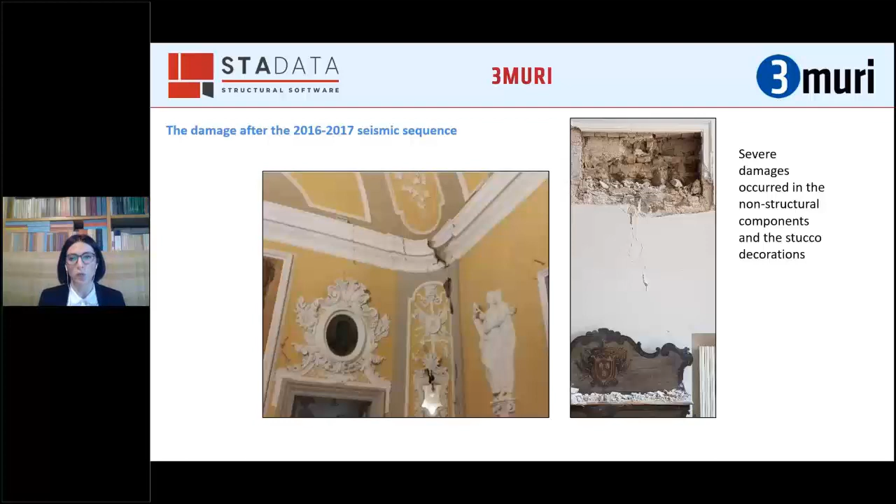Severe damages occurred in the non-structural components, in the stucco decorations. Sometimes inadequate construction details cause local damages, as in the case of the connection of these wooden truss and the masonry underneath it.

The most severe damage was observed in the theater, where the external layer of the masonry gable crumbled due to the poor quality of the masonry and caused the partial collapse of the portion of the underlying roof structures. In addition, the earthquake caused disarrangement of the theater's roof covering, and unfortunately, the necessary countermeasures were realized only after 3 years, and so the rainwater penetration led to the collapse of the camorcanna vaults in the gallery.

As mentioned before, Palazzo Comunale is part of a masonry complex, and given the historical evolution of the complex and the structural morphology of the structural units that made it up, we decided to split the complex into 4 structural units having homogeneous characteristics, and model each unit individually rather than considering the numerical analysis of the entire complex.

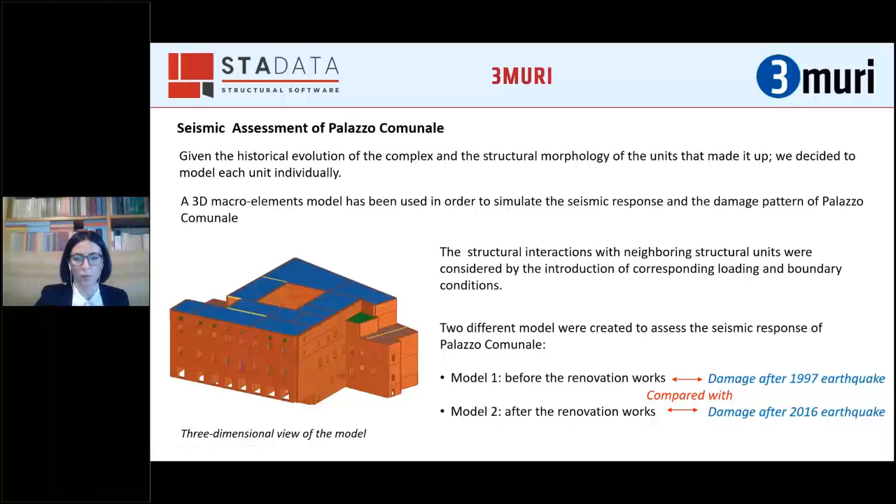To investigate the global response of the building, a simplified displacement-based procedure using nonlinear static analysis was performed. The model was loaded with a distribution of in-plane actions, monotonically increased to simulate the effects of inertia forces. Two systems of lateral force distributions were applied, not simultaneously.

The first distribution was proportional to the displacement of the corresponding first modal shape, chosen since it was representative of the behavior of the structure in its original undamaged configuration. The second distribution was proportional to the inertia masses, more representative of the behavior of the structure at collapse. As the control node, we adopted the average displacement of the nodes at the roof level.

To express concisely the results related to the two models, I have reported only the values of the minimum seismic safety index, the alpha parameter, defined as the ratio between the maximum seismic acceleration corresponding to the life safety performance level and the expected maximum acceleration prescribed by the Italian code. Before renovation works, Palazzo Comunale exhibited very poor performance, with a seismic safety index equal to 0.35, as a result of shear progressive failure of the piers.

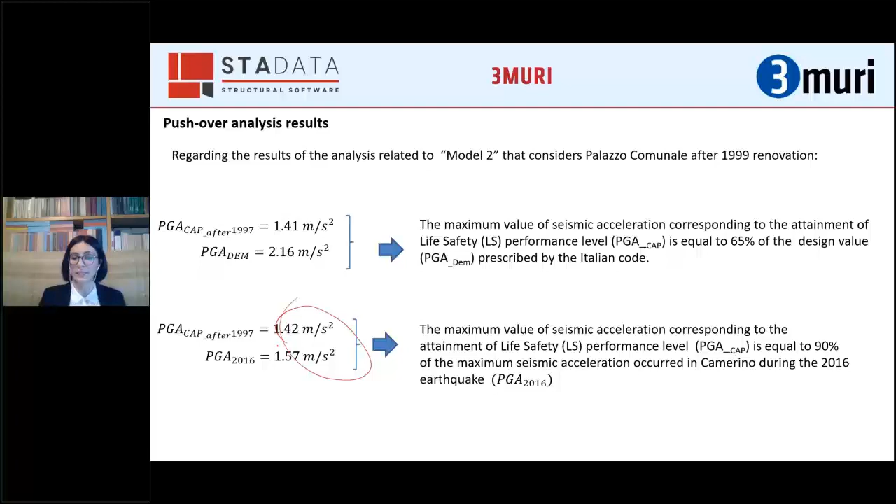As you know, the pushover analysis just presented takes into account only the in-plane behavior of the masonry panels. It is necessary to analyze the out-of-plane response of the walls and verify the activation of local collapse mechanisms.

For this purpose, a macro-element approach based on the theorems of limit analysis was used. Each mechanism involves only a single masonry panel or an isolated portion of the building considered structurally independent from the rest of the building, modeled as a set of rigid blocks connected with hinges.

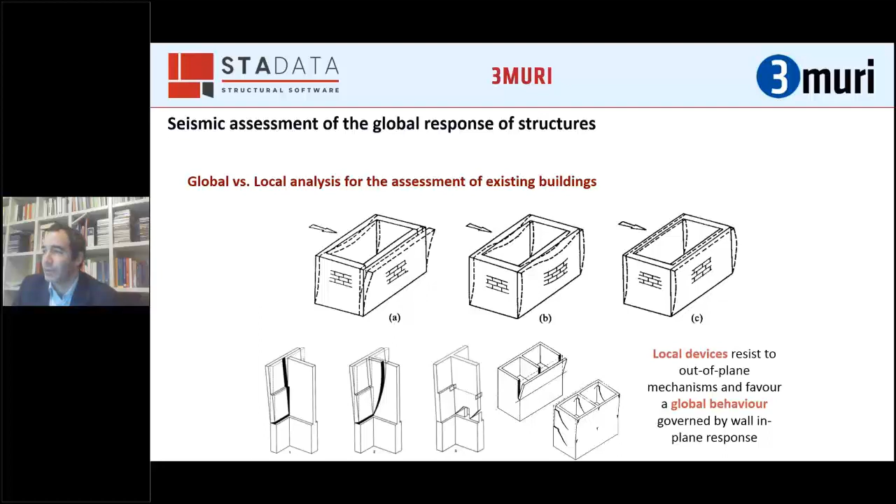The use of pushover analysis—a nonlinear static analysis—allows us to carry out static analysis accepting some simplified formulae for the calculation of displacement demand, while we can identify the evolution of strength with lateral deformation, potential mechanisms and fragile elements. We can predict the localization of deformation demand in specific elements, and then target our interventions to improve all these characteristics.

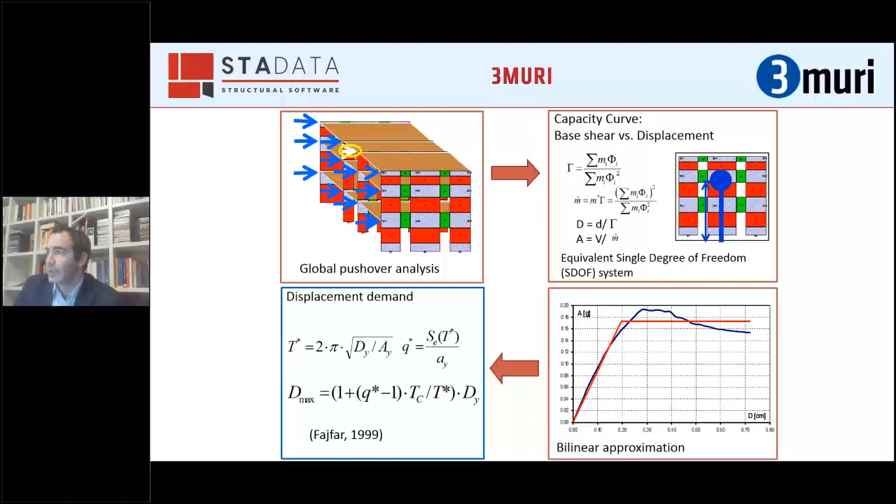What is also relevant is that pushover analysis provides the evolution of capacity with increasing lateral displacement, but it also allows checking the spread of damage and the peak of damage for increasing displacement. In this sense, it is widely recognized that lateral displacement is a good measure of damage, a good proxy of damage. So we can easily use this global displacement as a measure of the damage levels for different limit states.

In particular, you can identify points on the capacity curve marking different limit states, which can be operational, slight, moderate, severe, or near collapse, depending on the codes and on the definitions that the code provides for these damage states.

I was saying before that we need a tool, a computational model for running pushover analysis of masonry structures. There are many characteristics that this tool should fulfill, and so it has to comply with all the failure modes of all structural members that are included in the model.

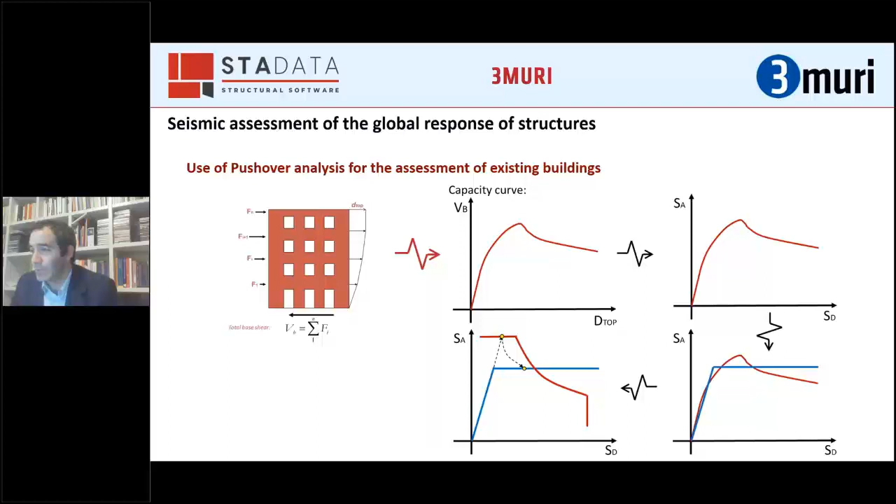The equivalent frame approach is something we developed following, first of all, observation. If you look at the damage after major earthquakes in areas with masonry buildings, the last relevant one being in Croatia, we can notice that damage is typically concentrated in specific elements, in particular in piers, in some cases in spandrels, or a mix of damage in piers and spandrels. But these are the elements where we typically have damage concentration.

This allows us to idealize the lateral in-plane behavior of a wall with openings as that of an equivalent frame structure, with vertical elements coinciding with the piers, horizontal elements typically being spandrel beams or other beams that can be present, for instance concrete beams representing the out-of-plane stiffness of floors.

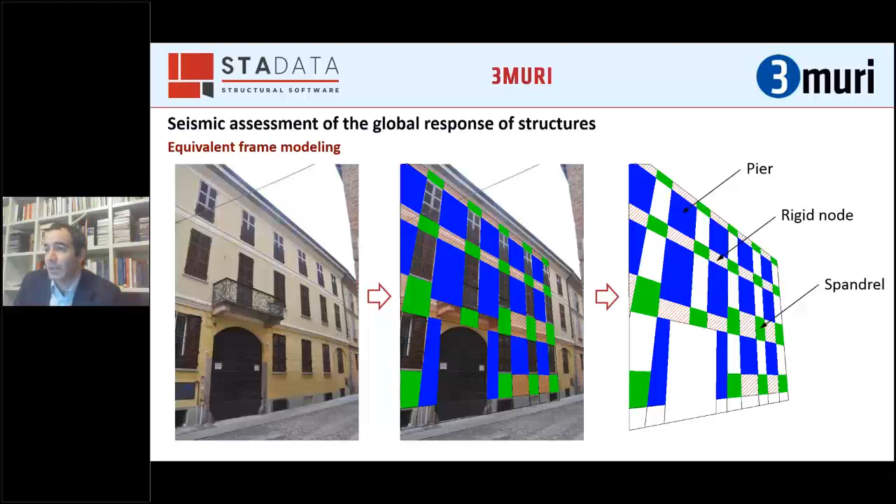The identification of an equivalent frame model from the geometry of a facade can be almost automatic and trivial, or can require the specification of clear steps. You can see the rationale followed in Tremuri for this identification: you first identify spandrels, then piers, and the remaining parts are assumed to be rigid nodes of masonry connected with the nodes of the frame, represented in the figure on the right.

This is simple in the case of regularly distributed openings, even if near the ends of the wall you may need rules that increase the effective height of these piers. This also depends on the type of lintels above your windows or doors, because if the lintels are very well connected and deeply embedded into the piers, you cannot have a crack starting from that point, but then you tend to have a effective pier height equal to that of the neighboring opening.

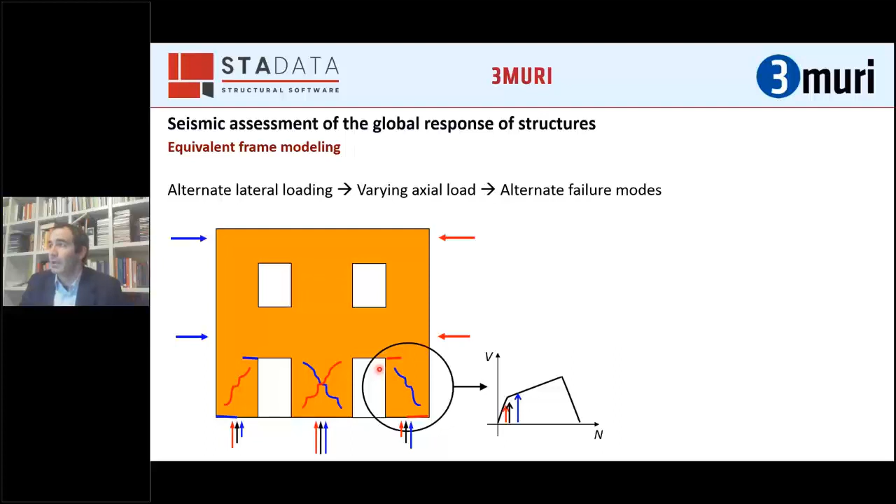The other important aspect that needs to be covered by your tool is the capability of analyzing floor diaphragms considering their actual stiffness. This is a relevant aspect because this in-plane stiffness of the diaphragm governs the lateral spread of forces and sharing of horizontal forces among walls in a pushover or dynamic analysis.

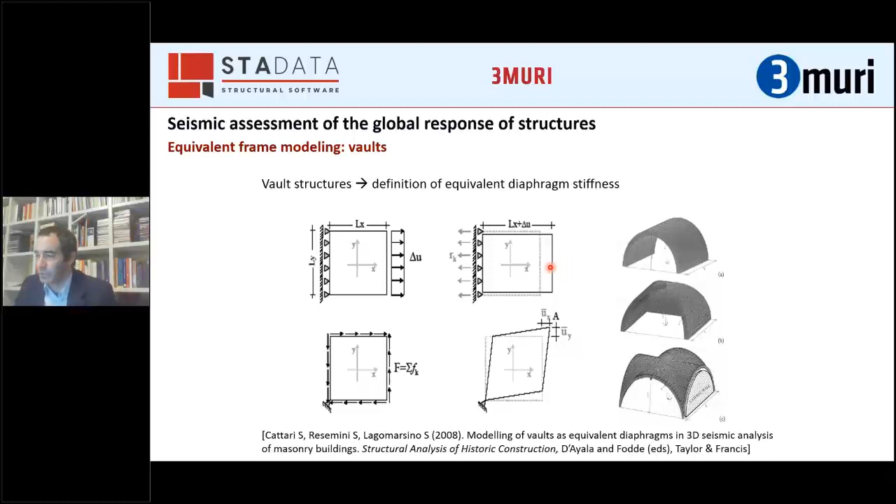The other thing is that in case of very flexible diaphragm, the model allows performing analysis of single walls, and this is generally correct in the sense that if wall-to-diaphragm and wall-to-wall connections are effective, we can assume out-of-plane displacements are prevented. We saw it in the video at the beginning of this presentation, but still we cannot count on any coupling effect of the floors in transmitting forces from one wall to the other.

So we can work on these kinds of substructures, which are the in-plane analysis of walls. But when we do this, we should also properly account for computation of tributary vertical loads and masses, in particular inertial masses that need to be properly evaluated in the case of in-plane single wall analysis.

The tie effect of floors matters because even if floors are connected, they may not provide sufficient shear stiffness to couple the displacement of different walls, but it can couple the displacement of different nodes of the considered wall at the same level. It should also account for the tie, or flange effect, of portions of perpendicular walls that can transform this masonry portion into collaborating portions if the connection is suitable.

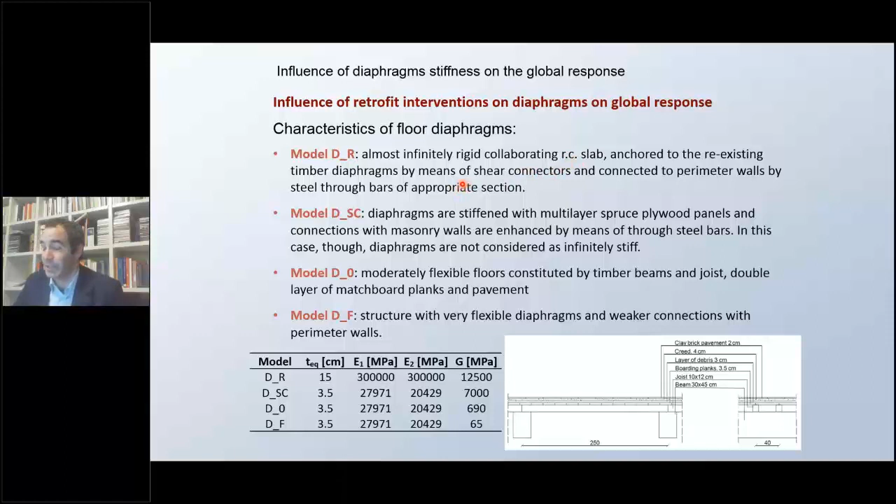So basically the initial condition, then moderately flexible floors when we have some stiffening effect of double layer matchboard planks and pavements. Then we have an intermediate case of stiffening diaphragms with multi-layer spruce plywood panels, so some timber-based interventions, and these almost infinitely rigid floors obtained by applying a collaborating RC slab stiff enough, as in some of the interventions presented about the Vienna buildings.

What you see is that modal analysis provides results in which, for very flexible diaphragms, we typically have independent modes for the different walls, whereas for rigid diaphragms we tend to have a global response. This is also clearly checked in the percentage of participating masses, which is 46% in the flexible diaphragm case, and goes up almost to 90% in the rigid diaphragm case.

And these are the curves, and you can see there is a significant increase in terms of lateral strength when we move from the flexible diaphragm to the rigid one, or at least stiff ones, which demonstrates that in this case we have a collaboration between the different walls, enforced by the presence of these stiff elements.

These are some results from nonlinear dynamic analysis performed on the same buildings. I'll go quickly on this, but what's interesting is that in terms of comparison between pushover and nonlinear dynamic analysis in terms of displacement shapes, even in the case of quite flexible diaphragms, in this case at least, the approximation of the deflected shape is quite good for a pushover analysis performed on a large building like this, instead of performing the analysis on the single walls separately.

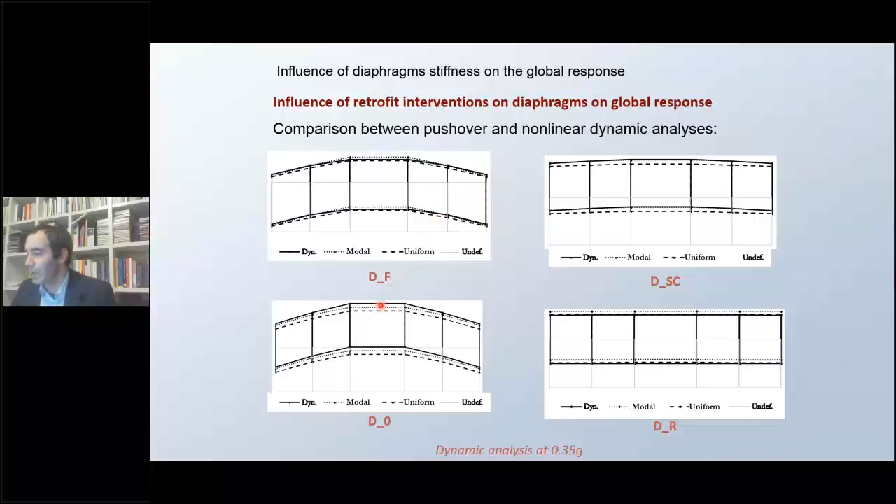The point is that not only the displacement shape, but also the displacement demand is approximately well captured, but in some cases, depending on the load pattern adopted for the pushover analysis, we have better or worse approximation. This leads to the last point of this presentation, related to the approximation we have intrinsically in the use of nonlinear pushover and nonlinear static analysis, which is the computation of the displacement demand.

As I was mentioning before, when we use a simplification like this, we need to use either an overdamping approach, which is the one embedded in the capacity spectrum method, or we can use inelastic spectra, which have a spectral reduction accounting for the ductility.

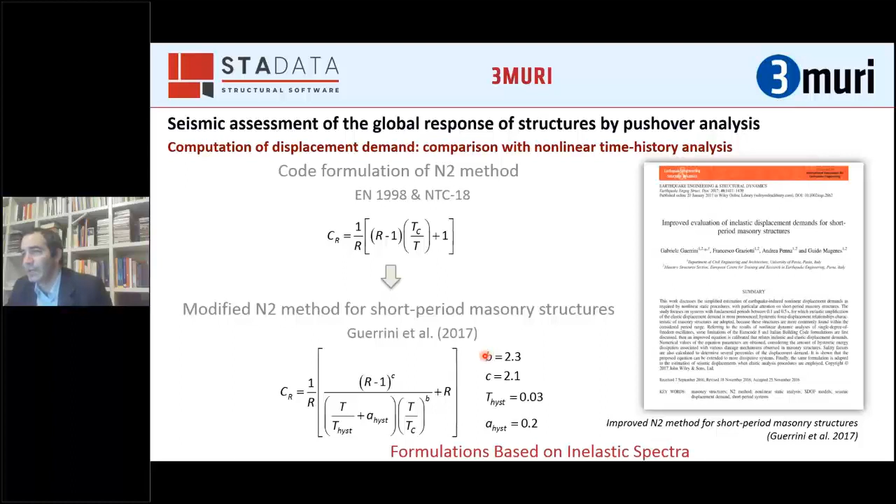In this case, we can see that we can correct this trend, which is again conservative for the lower displacement demand levels, but that becomes unconservative in the higher displacement and ductility demand, where it should be more.

This is the plot we have seen before. So I thank you for your kind attention. I hope this final presentation, which was not as nice as the previous one, has still been quite interesting to have something different at the end.